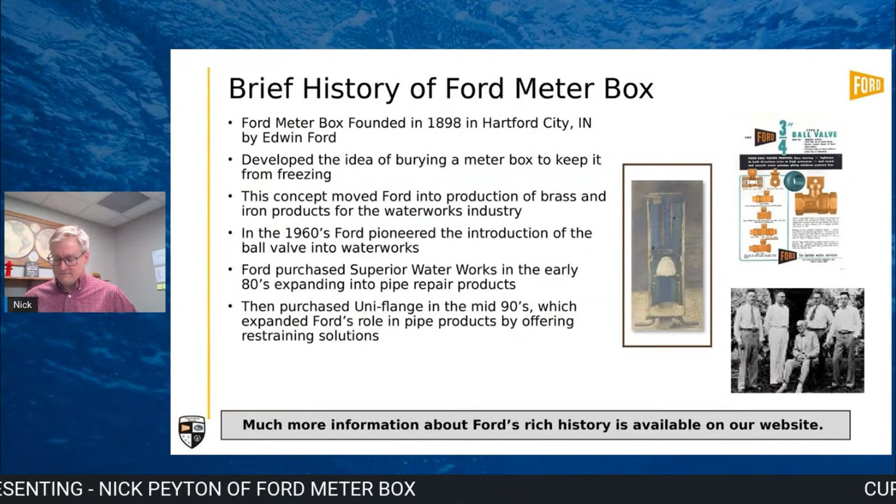Now that was the overview of the history, and to support that product offering, Ford maintains 2 major manufacturing facilities in North America and 5 warehouses.

First, our headquarters, where I'm actually recording this. Our headquarters are located in Wabash, Indiana, with a facility covering 54,000 square meters or 581,000 square feet. For those reading my slide, I have to keep my audience in both metric and imperial. Not only do we have manufacturing here, we have a brass foundry where we pour no-lead brass and some leaded brass occasionally, but we machine, bend, weld, and ultimately manufacture thousands of brass products, meter setters, and meter pits annually.

Now, in the southern part of the United States, our Pell City, Alabama facility is home to our Uniflange restraint lines and many other pipe products. There, they cut, stamp, weld, machine, and create finished pipe products, which means we cover everything from repair clamps to tapping sleeves, couplings, and joint restraints. This facility covers 31,000 square meters or 335,000 square feet, again for my metric and imperial members of the audience today.

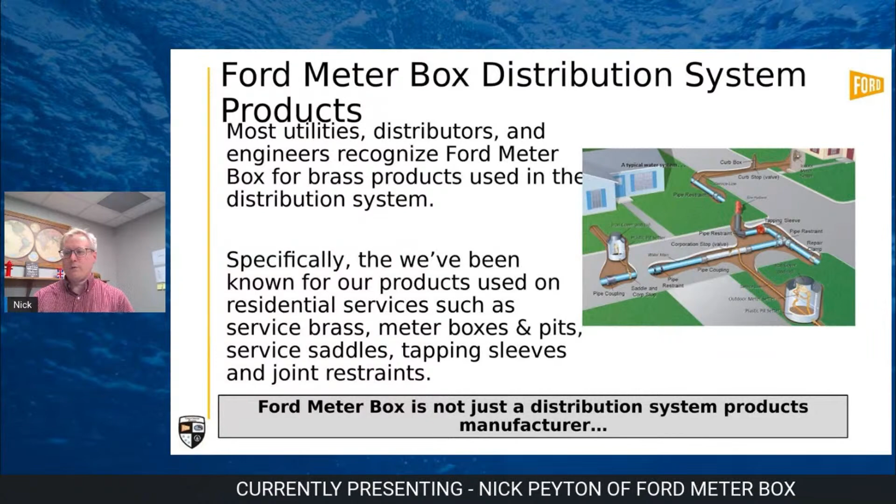But in the past few decades, we've also become more synonymous with Uniflange, the joint restraints, and some of our other restrained product offerings. So to sum this up a little bit, for the underground or distribution market, Ford has been a trusted supplier of our products for over 100 years, with a variety of products that go from the pipe all the way through to the residential service.

Now, what most people don't actually connect us with is that we also serve the plant side of the business as well, or the area inside the fence — the applications of both the water and wastewater systems that aren't necessarily associated with the distribution system or residential connections.

To give you an idea of the various types of projects that we can supply products to, let's take a look at some of those areas and markets. Now, I apologize in advance — that's mighty fine small print there, and I should have done a better job to make that bigger and more available to you. But let me walk through some of the highlights of this slide.

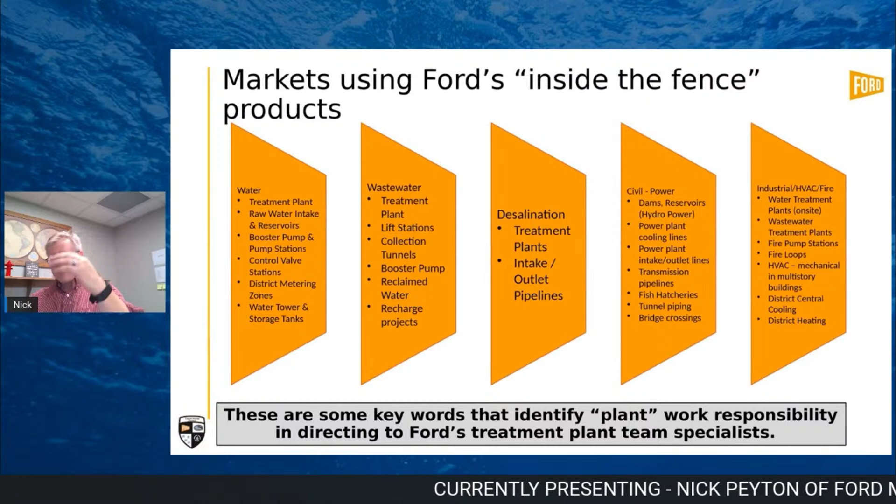In the water market, you can find our product on treatment plants, booster pump stations, water towers, control valves, zoning vaults, district metering vaults, and many other water applications. And then on the wastewater side, you can find us in the treatment plant, our lift station, collection tunnels, booster pump stations, and recharge and reclaim water projects.

You'll find our products also in some desalination facilities, on the intake lines or in the actual facilities themselves. And then in the civil market, you'll be able to find our product in dams, reservoirs, power plants, fish hatcheries, tunnel piping, and even bridge crossings.

And then lastly, we cover the industrial market — whether it's a private treatment facility or something along the fire pump station or in the fire loop itself. So as you can see, we cover a number of project types and markets that cross over and are adjacent to both the water and wastewater market.

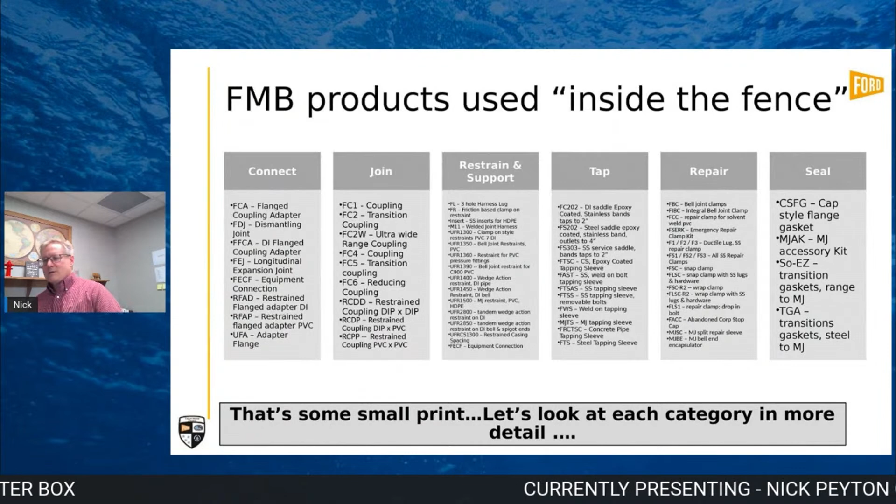But more specifically — and that's a very broad way of saying we have products in those markets — what exactly are those products? Now again, my apologies, because if you thought the last slide was pretty small print, this one is really going to test your eyesight, and I apologize. You might actually think at this point I get paid by the word. I do not, and I'm not going to read this word for word. We're going to talk about the highlights on this slide.

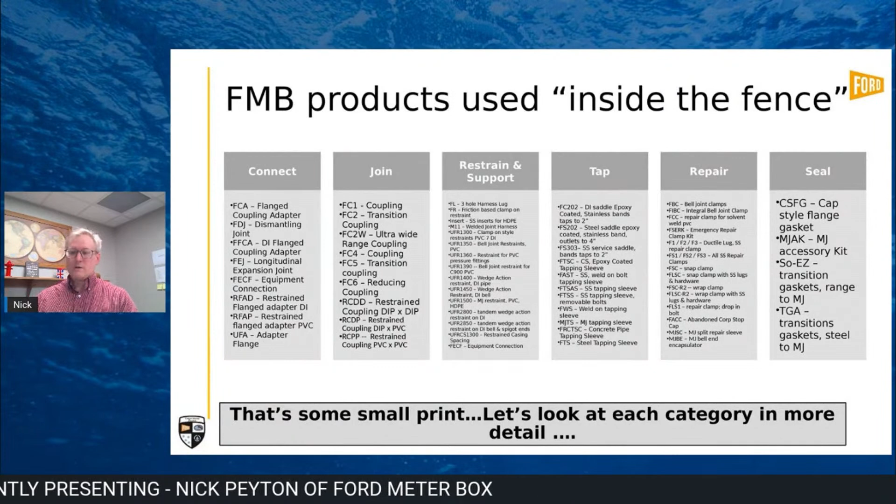This page gives you an overview of the sheer breadth of product that we can manufacture based on the application within the facility or within the project, in these areas inside the fence. So we make products that allow the pipelines and plants to function within the water or wastewater system, both above and below ground. To help make sense of it, we've broken these up into some categories.

We can talk about products that connect flanges or join plain ends of pipe. We provide products that can restrain and support the pipes and pipelines. And from small line to large diameter, we provide a range of products that tap and allow for adding a new line. And then when those lines leak, we offer a line of repair solutions to match your preference. And whether you're connecting or joining, we also offer products that provide the seal in those joints.

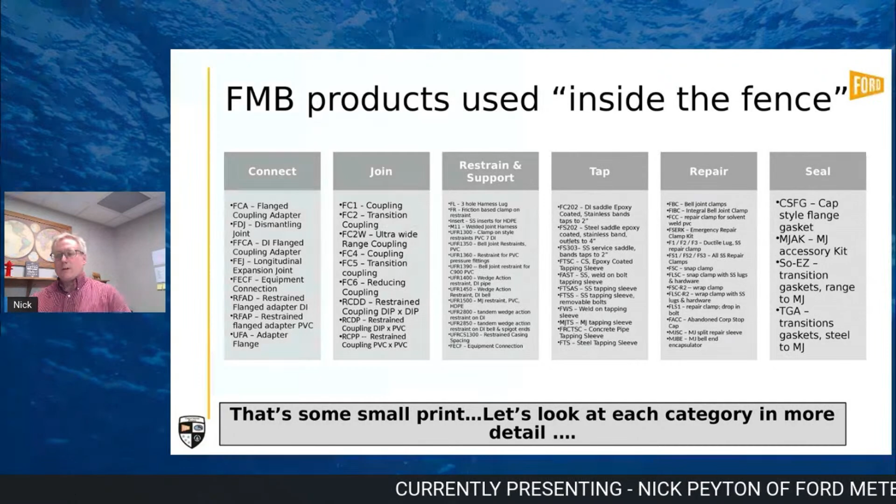Now, as I said, we're not going to go through each one of these models — I'm going to speak on each of these categories with some general information. Several of these products are similar but reflect a choice of a utility based on materials or configuration, or maybe a pressure category. So you're not going to hear the specifics, and I'm not going to bore you with every minute detail on size range or pressure rating of this product — unless, of course, you've already tuned me out, you're not listening, and then there will, in fact, be a test at the end.

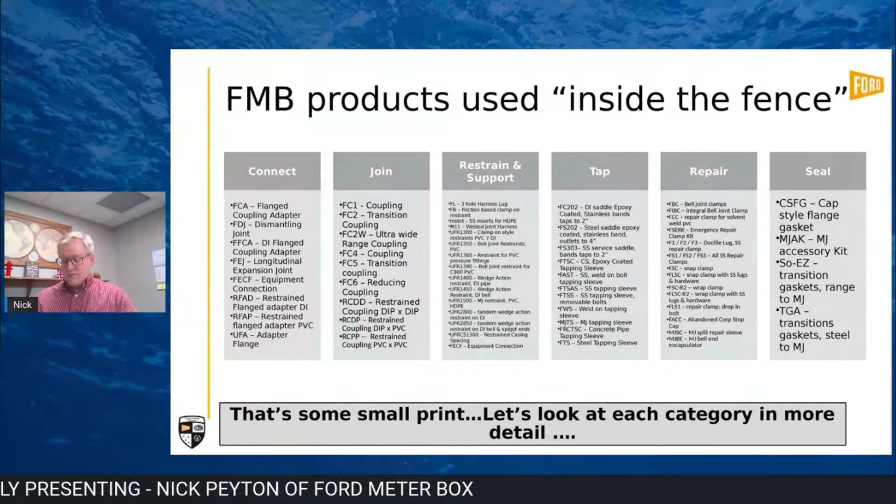This is meant to be fairly general, just to highlight the sheer scope and breadth of our product and an understanding of how Ford is your pipe products partner within the treatment plant market.

I'm going to start with the connecting group, or the flanged end. The simple flanged coupling adapter, whose name states exactly what it is, we make those to expansion joints, or the maintenance team's best friend, the dismantling joint. We offer a range of products, both restrained and unrestrained, for connecting all of these flanges together.

One of our more recent products added to this group is the equipment coupling, or equipment connection. This is an upgrade to the dismantling joint. It offers a 3/4 inch offset and up to 4 degrees of angular deflection, which helps cover lateral, radial, and angular misalignment, a common challenge when connecting old pipes or installing new equipment into an existing pump station.

All of these flanged ends and coupling adapters cover the spectrum of pipes. They come with ANSI 125-pound for ductile iron, or 150-pound steel ends, depending on which nomenclature you use. Other flange drilling patterns can be made available, such as 250-pound on ductile or 300-pound on steel. So we have a wide variety of flange couplings in our arsenal.

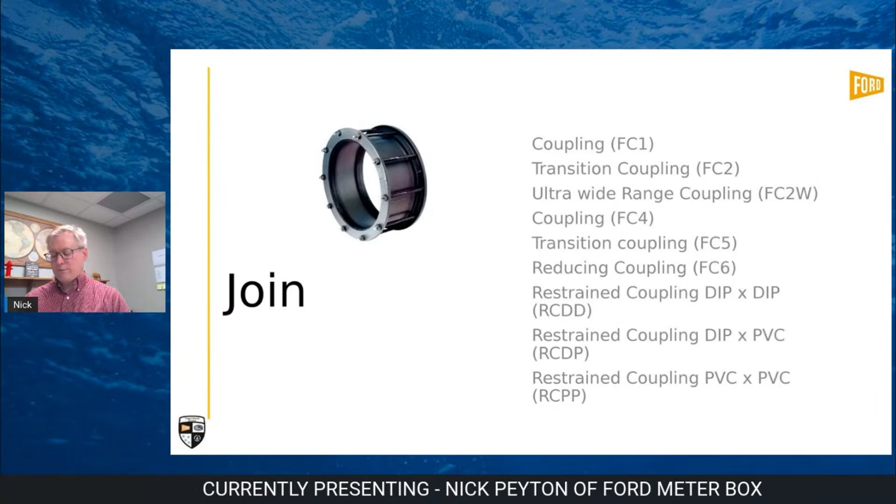Now, moving to joining two pipes together, whether the same type of pipe or two dissimilar pipe ODs, we have an array of joining options as well. While most above-ground piping consists of steel or ductile iron, the need for a wide range coupling is infrequent. But transitioning pipe sizes with a reducing coupling can often be found in buildings, connecting older lines to newer lines, and we have the solutions you're looking for.

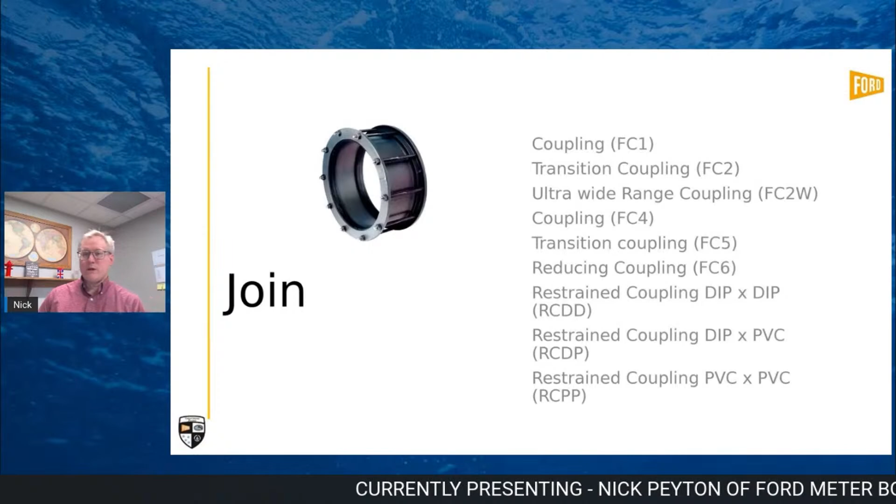You've also got piping between buildings that can be PVC when buried underground. We have a line of restrained couplings that can cover either ductile iron pipe OD or PVC OD, or even connect ductile to PVC. All of these products are designed to join the same type of pipes or different pipes together. And if you need to join steel to PVC and then back to ductile iron, we can cover that for you too.

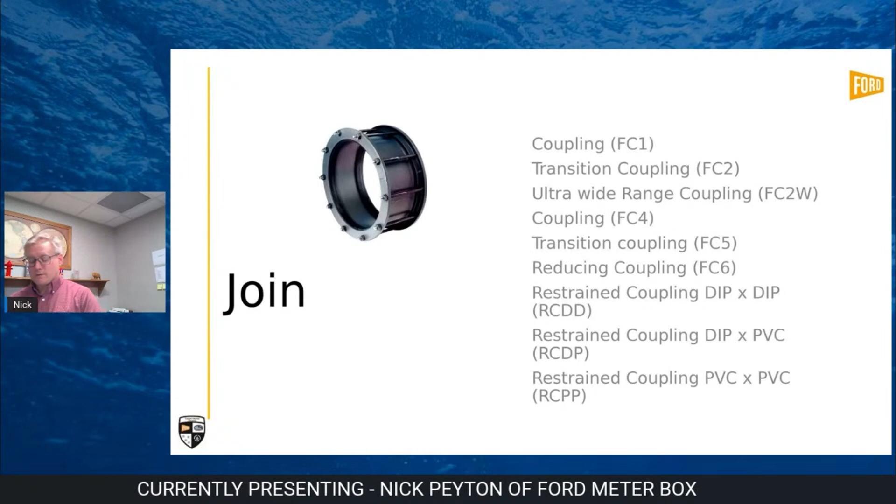Now, in the prior two slides, I did mention restraining product. We know that in this industry, you need to restrain pipe. Whether it's covering piping on a connecting flange or covering a joint of pipe, we have a wide range of Uniflange branded products.

We have everything from the very simple flanged lugs—that's just a restraint or a coupling that'll restrain a coupling between two flanges—to inserts for stiffening HDPE, or high density polyethylene, to covering a range of PVC or ductile iron restraints that can restrain the bells and provide you a restraint at the mechanical joint end.

We have a number of products, some of which I've mentioned, that are either on the connecting or joining slides. One thing to highlight in this category is that we also have a line of restrained casing spacers, a product that can support the pipe barrel or support a pipe bell. All of these products offer you a solution in restraint.

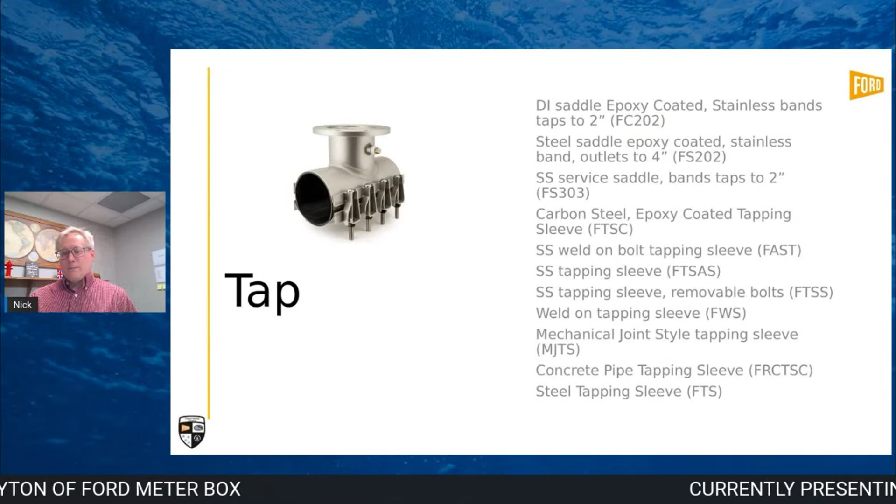We offer an array and variety of tapping sleeves and saddles depending on your preference. You have everything from small service saddles that support inserting new chlorine injection points or adding a small line for test sampling, to a tapping sleeve in all stainless material, a drop-in bolt, or a repair clamp type for installing a new large line. Prefer to weld your steel outlet onto your steel pipe? We've got that covered as well.

One of our newest product offerings in this category is our tapping sleeve for concrete pressure pipe, which allows the tapping crew the ability to tap and then regrout to the existing line, so you can successfully transition from your concrete pipe to the newly added line of your material preference.

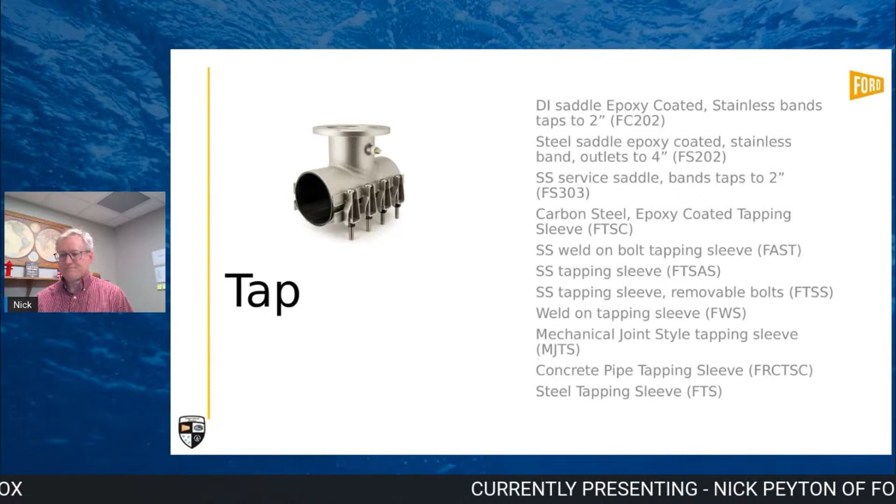Now, we covered connecting and joining and restraint and tapping, and this is the area where normally you have some conversation, because unfortunately pipe and pressure, with that comes leaks in the system, and this happens inside the plants, inside the fence, just as much as it happens out in the distribution system. They can be small leaks, they can be large leaks, and they can come in many different types and sizes.

So depending on the type, we have a number of options based on your preference and how you want to repair. Do you need just a bell clamp? Have a pesky pinhole leak? Do you prefer a ductile or stainless lug for your repair clamp? We even have a service pack option called the FSERK, which allows a small utility the ability to repair multiple OD of pipes within a system by just having a small number of interchangeable repair clamps.

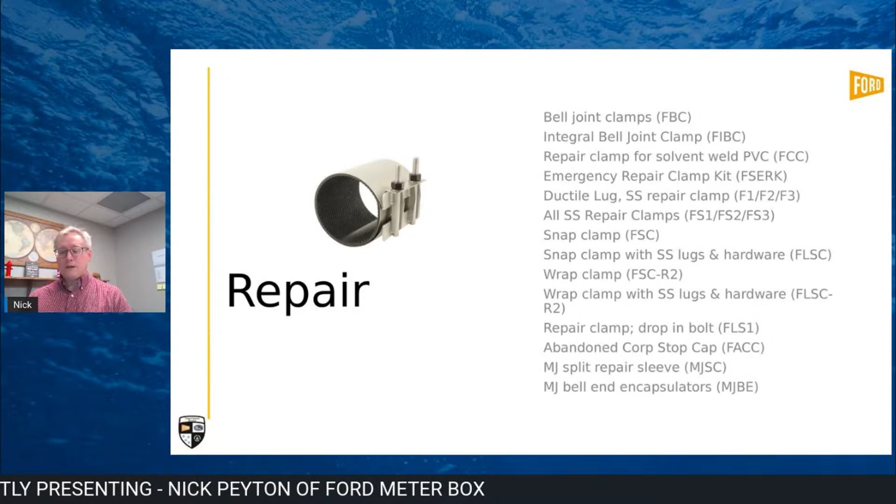But one of our newest products in this category is the bell Encapsulator, which fully contains a leaking bell end, in applications where cutting the bell out or shutting a line down completely are not available. So we've added that product, and again, we have a wide variety of offerings to cover how you would like to repair an existing leak or problem within your system.

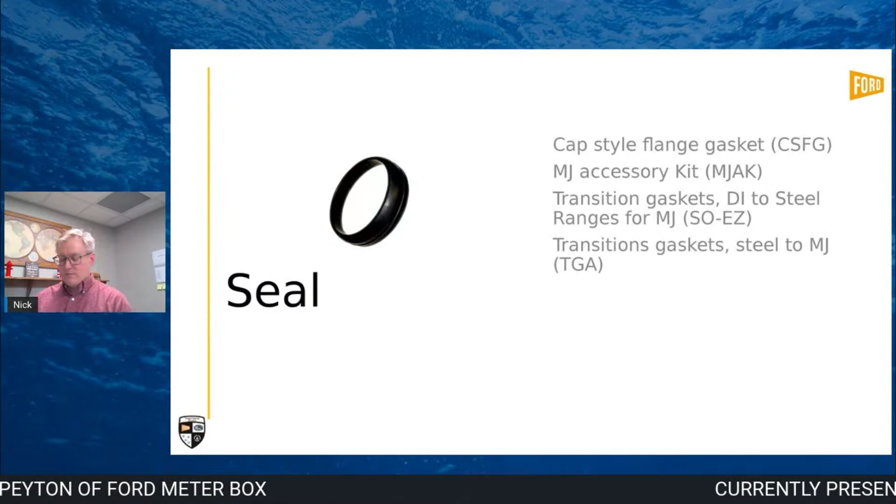Now, all of the previous slides were some type of connecting or joining or tapping, and we do want to take a moment to focus on some of the items that we have in our offerings that help do the hard work of providing the actual seal.

And we do have a full flange covering called our cap gasket. We also offer a patented SO-EZ gasket, which allows you the ability to transition from a steel pipe into a mechanical joint end, and gives you a cost-effective alternative, allowing a large diameter steel line, 14 through 24 inch, to be adapted to your mechanical joint product. Again, all of these are a must-have product if you're using it in both buried or above ground applications.

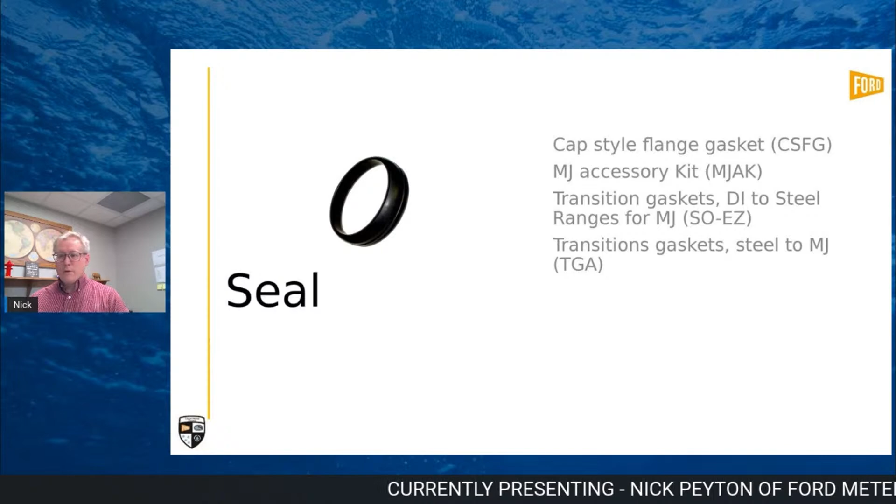Now, that was the product overview. And this is where I take a moment and take a breath, and then also say that we're going to talk for a couple minutes just about coatings.

Ford's product can come in one of several coatings. Each product has its own base type of coating. I should mention here that our 304 or 316 stainless steel products are typically not coated, nor is a steel product that is meant to be welded on or joined up to another - that's going to be a field application. But all of our standard ductile iron or steel products do have some type of base coating, and we will use one of the following types.

So we offer an E-coat or an E-coating that we use on all of our cast restraints. This coating methodology comes from the automotive industry. It takes a small thin film or microfilm of our material, applied via a heat treating process. And the end result is you get a very good scratch and chip resistance and good long-term corrosion protection - a very popular coating that we offer.

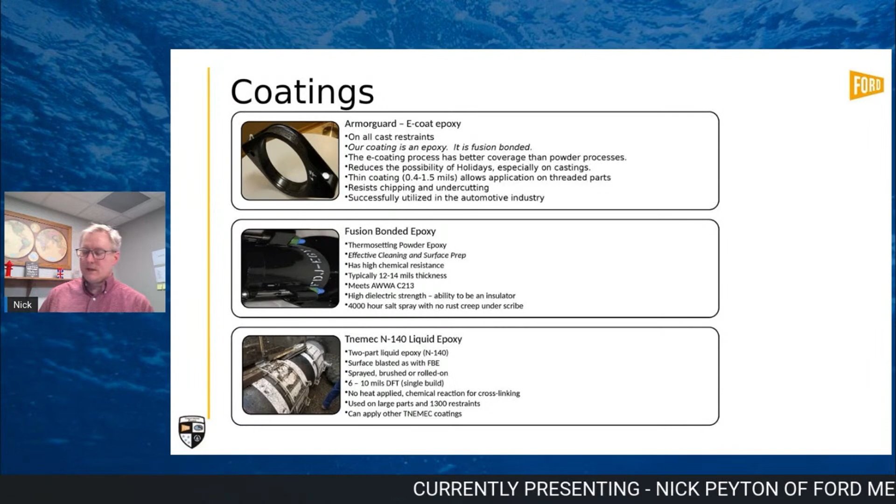Another is the FBE, or fusion bonded epoxy. In that process, you have to heat your casting up and then apply a thermosetting powder epoxy. A critical requirement of that particular coating is the cleaning and surface preparation. When done properly, by blasting and getting a near white finish, you've applied the thermosetting epoxy. The end result, you get anywhere from 12 to 14 mils thickness of the coating, and again, that's going to give you good, solid corrosion protection.

Then the last, and probably most popular, is our two-part liquid epoxy. In this case, we use a Tnemec brand N-140. Our surface preparation on the castings and materials is the same as what you would do for a fusion bonded epoxy - again, you have to blast and prepare your casting for the coating. Surface preparation, again, is key. One of the advantages is not having to heat the casting up, but also some of the overcoat ability that you get in the two-part liquid epoxy, which is often a must and a requirement in in-plant applications.

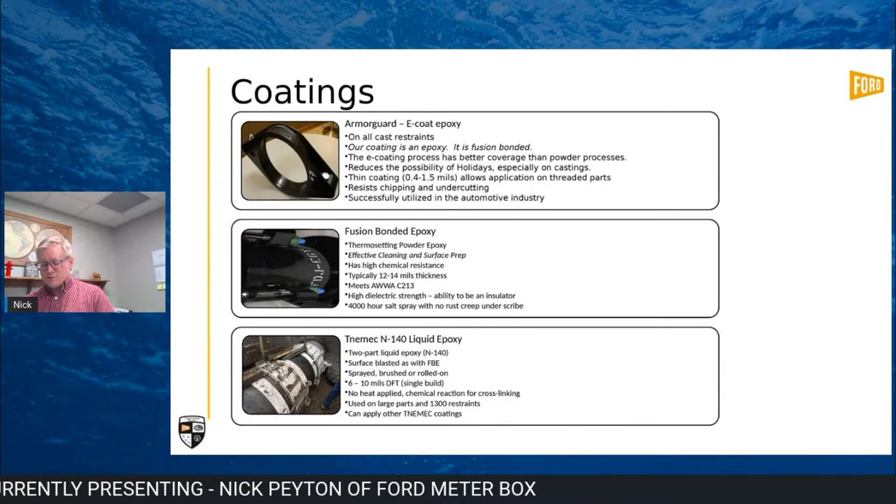Now, again, I'm going to take another break because usually this is where I pause and catch my breath. And usually I have several people who are trying to ask a question about which coating is best.

And so I am going to give you my best consultant answer: it depends.

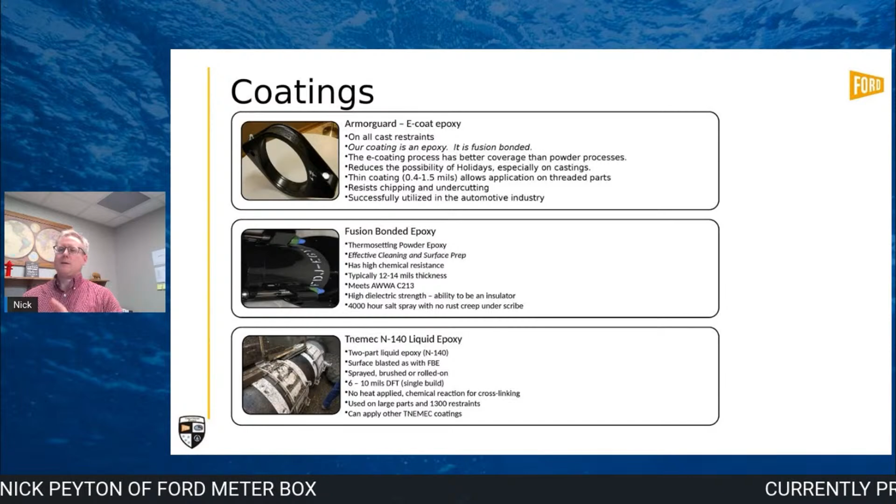Each product has different applications and options and considerations. Some are based on casting size, some are based on the product application, and some are even based on how you're engineering or designing your system.

Most are going to be concerned with product coating and durability, and the bigger concern is whether it's going to be able to be handled roughly. And if it is damaged, can it be field repaired and overcoated?

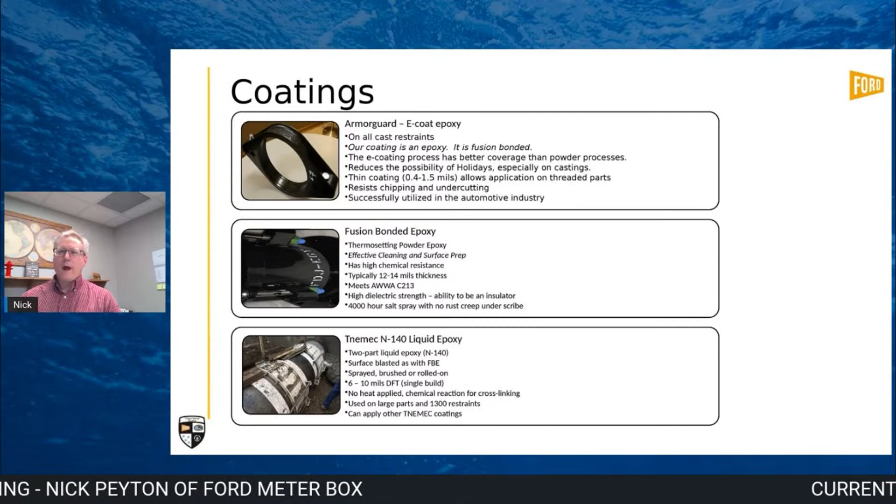In real world installation, you get real world handling, but then reality sets in. The products do get scratched and dropped and gouged and hammered, and quite frankly abused, in the field.

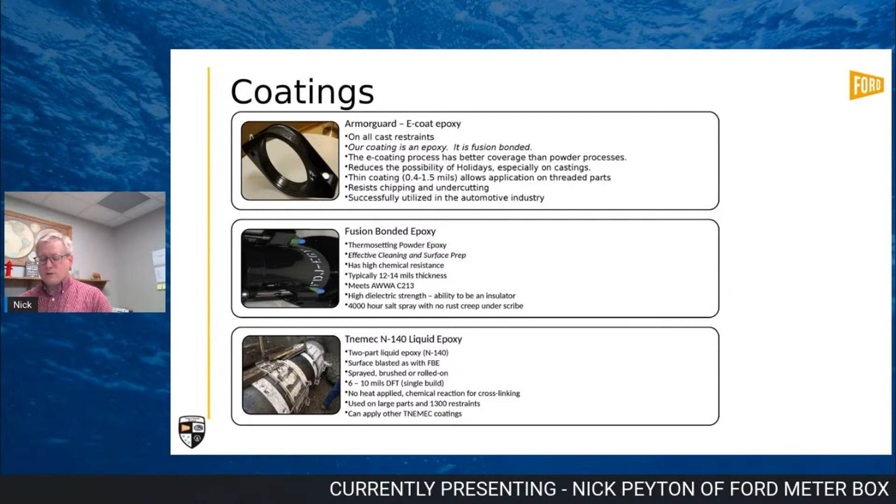You want to have a product that can accept an overcoat option, and that overcoat option can be field applied. That gives the owner, the utility, the contractor the best opportunity to do a field repair and on-site painting.

Now that was a very brief overview of our coatings, and I would encourage, if you have more questions on that, you can get in touch with our local sales team as well on coatings and coating specifics.

Now, in addition to all of those products that we talked about, Ford also offers tailored and engineered solutions. So if you need a special tee or some other fabricated product, we can design and build products in both steel and stainless steel materials.

You looking for a special outlet, an adapter spool, or just a connection or a challenge on how to connect or join two ends, we can help.

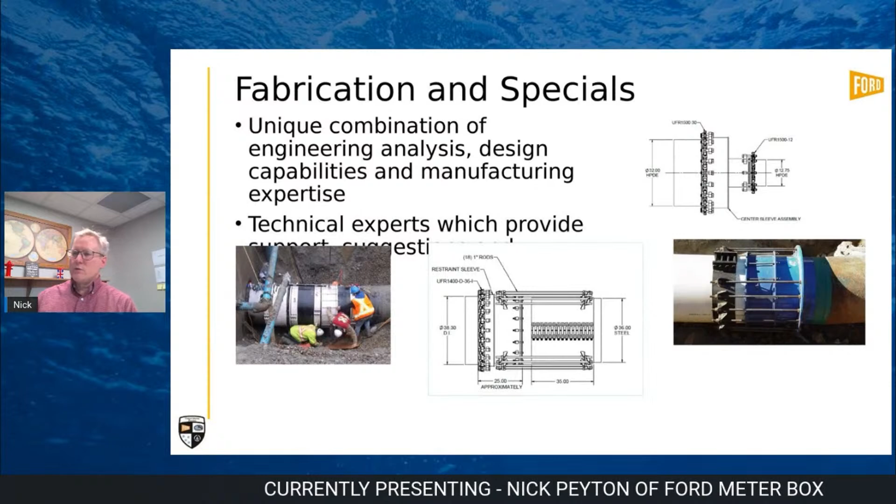And not only can we provide you with fabricated solutions, but engineering restraints, we can help provide you some tailored systems that will be specific to your applications. Again, we can give you exactly what you're looking for.

So if you have a special requirement, you need a dismantling joint that is 125 pound drilled on one side to 250 pound on another, we can do that.

Just be prepared to have some back and forth questions, such as the size, the type of pipe, what exactly are you trying to accomplish, are there any pressure constraints, and then, of course, how fast do you need it?

So looking at this, why is Ford your plant partner? Over the last 15 minutes or so, you can now take a breather, nudge your neighbor, start to wake up. This is where we're going to do the recap so you can tell your supervisor that you paid attention.

And we covered everything from connecting, joining, tapping, repairing, and sealing pipe, and we do all of that. We're constantly working with our customers and engineers to enhance our product offering, to give you an improved product, improved materials of construction, and even improving our communication with our channel partners and providing them training tools. We're doing all of that.

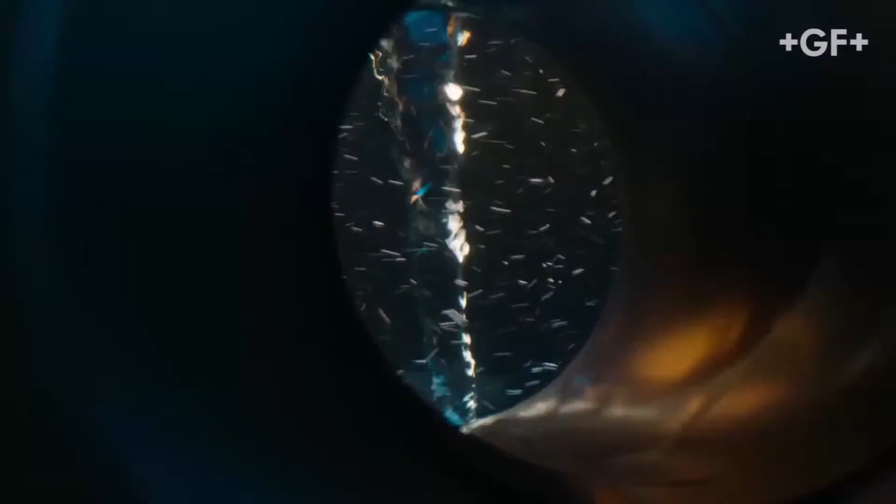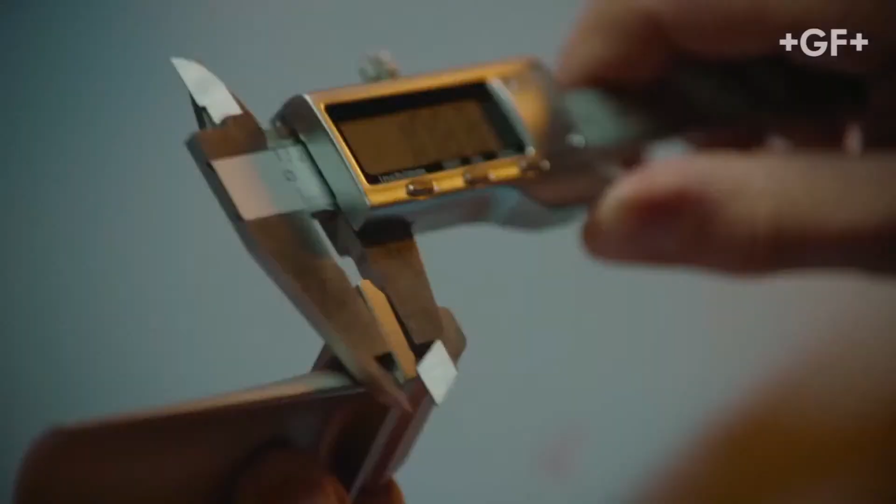It's GF. What is GF? What do these two letters stand for? Good question. GF is a big company, but it seems not everyone knows what GF is doing. Do you know what GF stands for? Well, let's find out. Could it be grapefruits, maybe goldfish, or girlfriend? Of course, it's none of them. Actually, GF stands for Georg Fischer, but nowadays it's much more about... well, it's not grapefruits. Our ambition from the day this young and modern company was founded, over 200 years ago, becoming better every day since 1802, has made us going forward ever since. Around the globe, our people are all about innovations, precision, Swiss quality, and sustainability. It's actually in our DNA. Going forward saves water by providing leakage-free piping systems and bringing it to wherever it's needed most. It means reducing the weight of automotive parts and therefore CO2 emissions. Look at this crosscar beam. Half the weight, double the functionality. What do you think?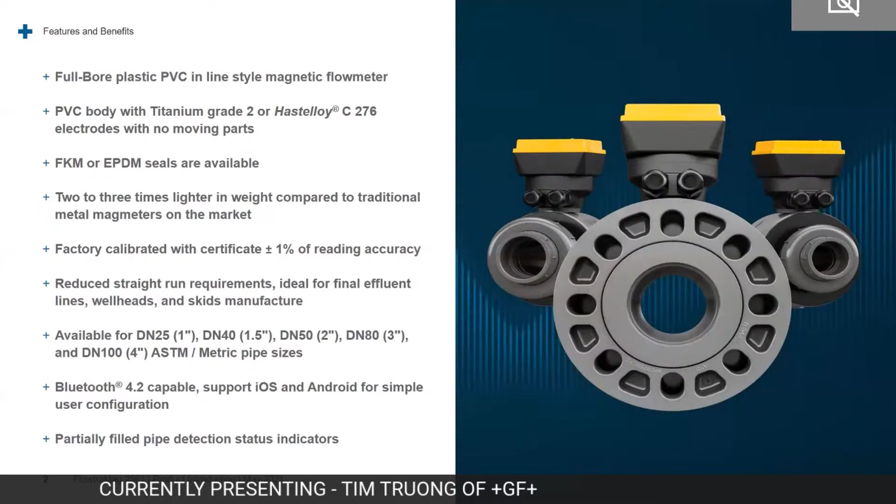And it can detect a partially filled pipe. Basically, most mag meters require a full pipe in the process, but this particular 2581 can detect the condition of the flow velocity in a partially filled pipe.

There's no pressure drop, and it can detect either a reverse flow direction or forward flow direction. So if the customer sees the reverse flow direction and they do not like it, they could configure it directly with their mobile phone or directly with the 0252 configuration tool.

One device with 3 different outputs, so it's field selectable. We offer frequency or digital S3L, and also analog 4-20 milliamp output, either passive or active, directly to the PLC. So again, this is really unique for water treatment skid manufacturing, chemical dosing, and any chemical processing application.

On the digital S3L or frequency output, you can select directly to the configuration tool or directly from your mobile phone via the Bluetooth app. When we ship each FlowtraMag, the default is frequency, so the customer could change to frequency or S3L.

On the analog output, we have active and passive output. That can be selected directly from your mobile phone or from the 0252 configuration tool connected to your PC. The default we ship from the factory is passive. Each FlowtraMag body is pre-calibrated with a K factor traceable to a NIST certificate.

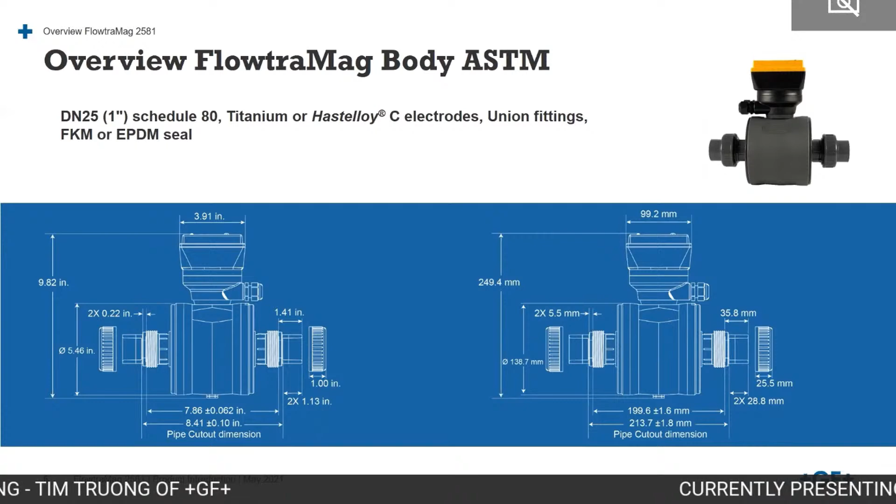Now let's look at the overview of the FlowtraMag 2581. As mentioned earlier, we offer a DN25, which is 1 inch, Schedule 80 PVC pipe. The electrode comes in either titanium or Hastelloy C, with a union fitting, and the seal is either FKM or EPDM. We offer different part numbers for titanium or Hastelloy C with FKM or EPDM. This is the DN40, 1.5 inch, also with a union connection.

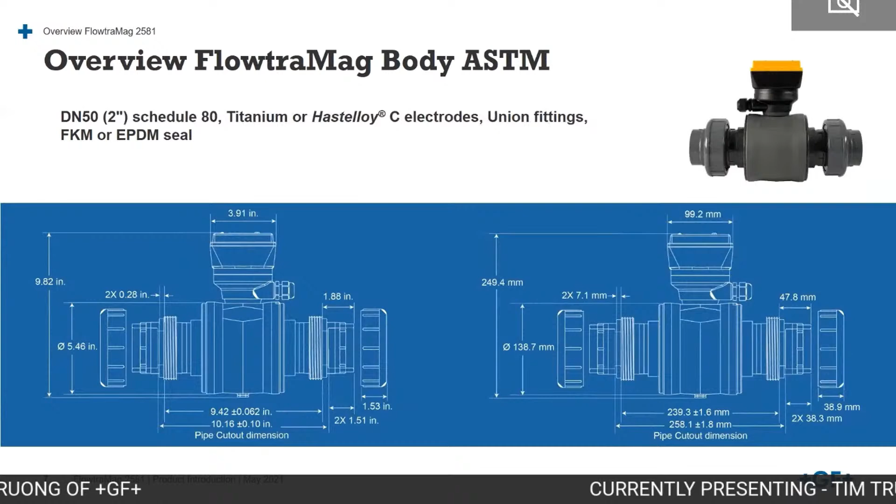The 2 inch DN50 also comes with union connection. The only difference is the DN80, 3 inch Schedule 80. Again, we offer 2 electrode materials, titanium or Hastelloy C, but on the plastic connection, this uses a Vanstone flange. So from 1, 1.5, and 2 inch it's union, and 3 inch is Vanstone flange, with FKM or EPDM. Also the 4 inch DN100 uses the Vanstone flange plastic connection.

This is the overview of how the FlowtraMag looks. You have a screen showing on your mobile phone, displaying the totalizer and live reading directly from your mobile phone with the flow velocity. This is the blind electronic housing, same for all sizes, and it can send the signal, either S3L digital signal or frequency, directly from the FlowtraMag to a transmitter or controller.

Active or passive 4-20 milliamp signal directly to a PLC or chart recorder, and then you could read locally via the Bluetooth app. We support iOS and also Android.

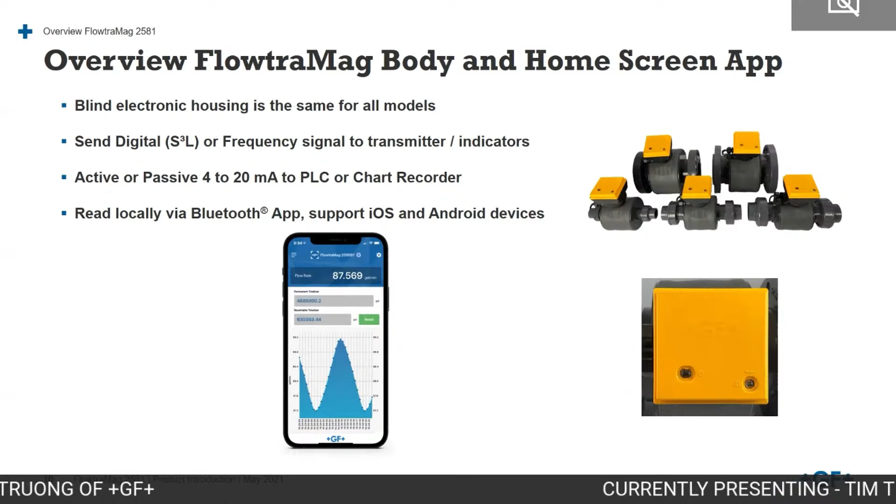To talk about theory of operation, how this FlowtraMag works is similar to the traditional Mag meter in the market. Basically, water flows directly through your pipe, and the coil generates the magnetic field, and the electrode detects the voltage from the magnetic field and flow velocity to tell you how much water went into the pipe. This is then displayed on the transmitter or controller, or directly from your mobile phone, showing the flow rate and totalizing.

Some applications I'm talking about, the target applications—mostly this information is mainly for our GF internal use, for our sales guys visiting customers to show the information to the OEM or customer. The market potential for this is industrial wastewater, municipal water treatment, landfill, chemical processing industry, energy, and OEM. Because the body is entirely plastic material, this is a unique selling benefit against metal Mag meters in the market.

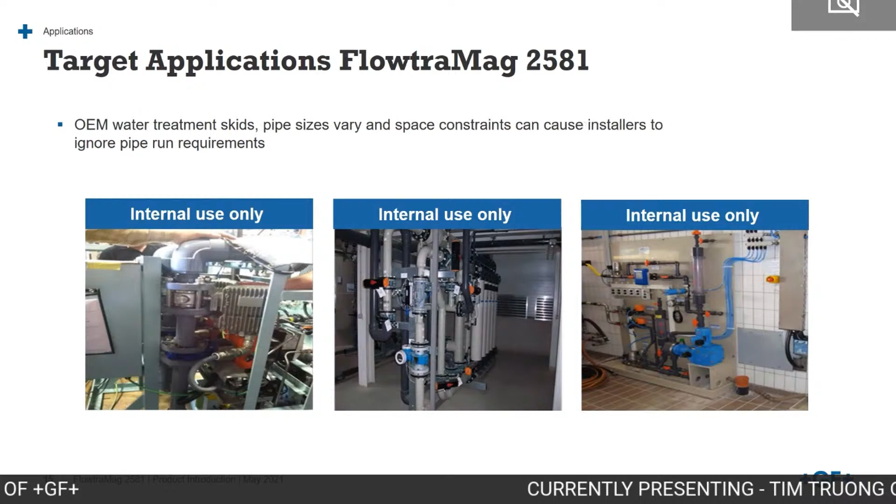It's also good for OEM water treatment skids because it requires a short inlet and outlet. Most water treatment skids require very constrained space, needing short inlet and outlet from the process. We've been selling this FlowtraMag in the market since 2019.

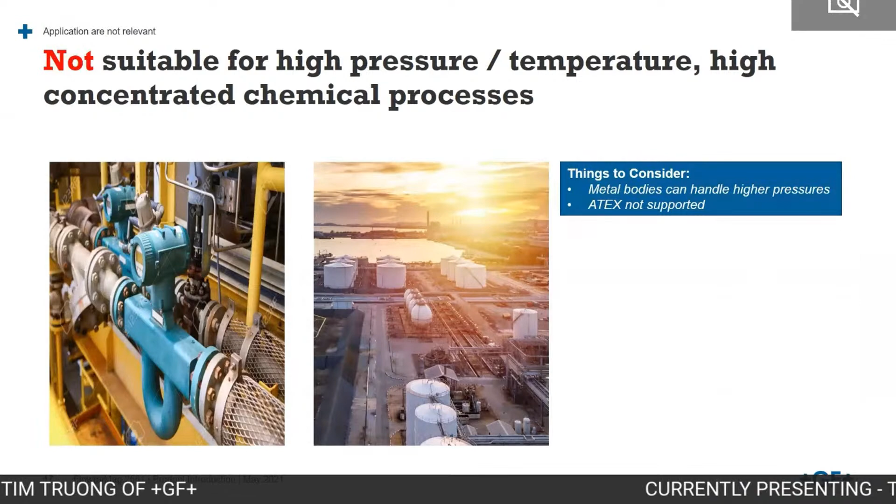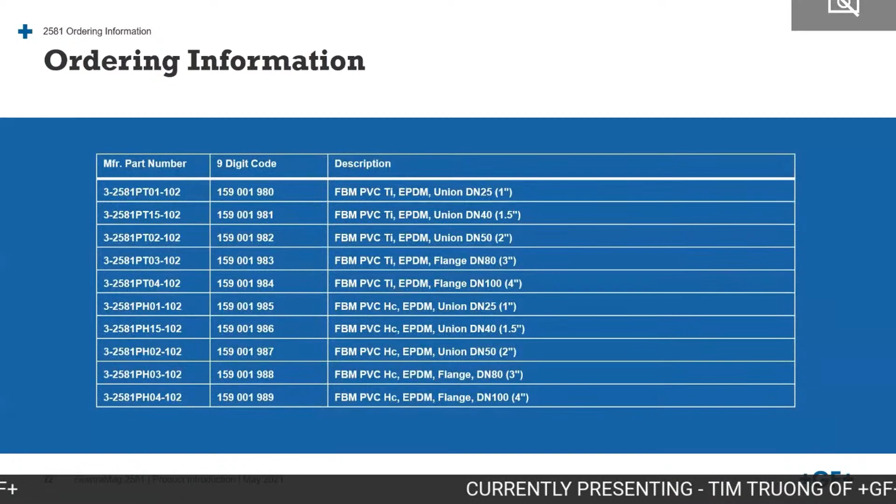Some ordering information - we offer 2 different materials of the electrode and 2 different materials of the sealing, which is FKM or EPDM. This is our traditional manufacturing part number, and also the 9-digit code number for the customer to order, plus the description. The last 3 digits, 102, is the EPDM material.

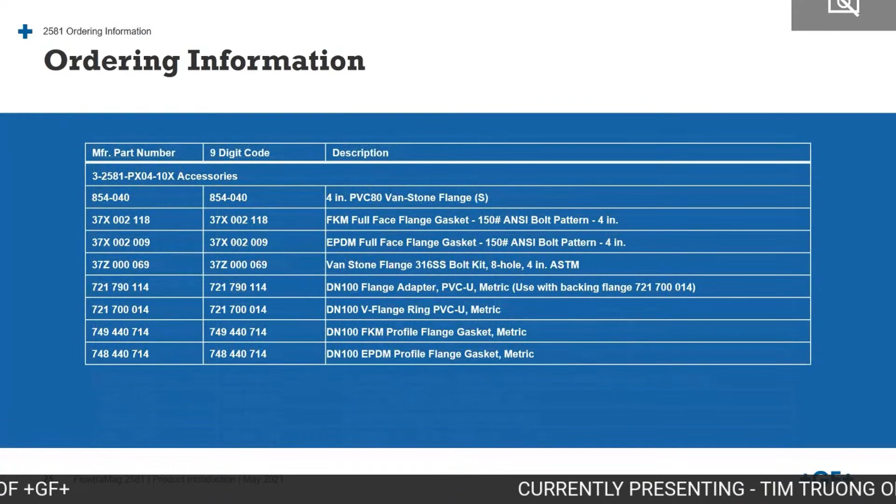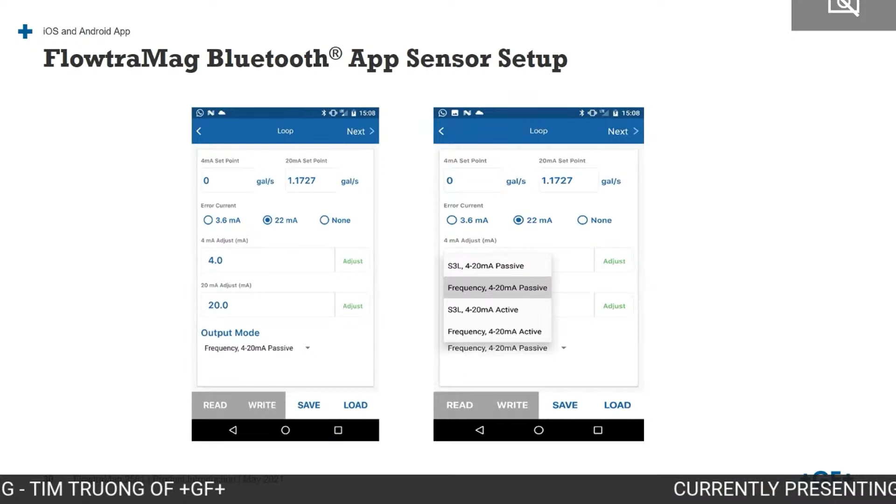Again, the default value from the factory - we ship it set to frequency, and for the 4-20 milliamp we set it to passive. So if you have a PLC taking an active signal, you have to change the output mode to active.

Always, when you are pairing the FlowtraMag with your mobile phone, you need to read the information from the FlowtraMag, because all the calibration data and information is stored inside the flow body. When you connect your mobile phone, you need to read the information, and then you can see all the information from your mobile phone.

Every time you change a configuration, make sure you save it and write it back to the flow body. Even if you save it directly from your mobile phone, you still need to write that changed information to the flow body. So you read the information, make a correction, write that information to the flow body, and save it. Then if you want to load it again, you can click load, and load the information that you already saved to the flow body.

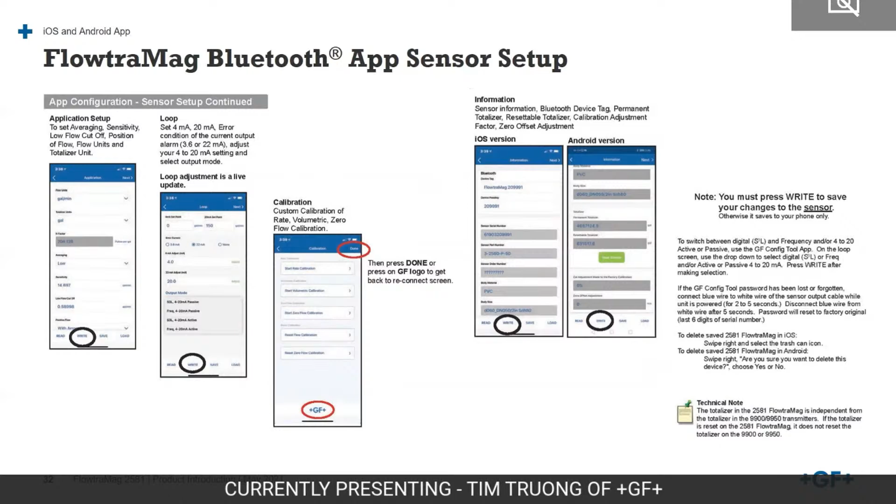And this is how you're going to see directly from your mobile phone. So you have the FlowtraMag, the 6-digit number, which is the product serial number, and also you have the light, which is a static light, either blue, red, or purple. That indicates the activity happening inside the flow body. And it's going to show you the flow rate, which displays how much gallon of water or how much liter of water is in the process.

It shows you the totalizer. One is the permanent totalizer, which you cannot reset. The second one is the resettable totalizer. And then it'll show the graph, which is the live reading from the FlowtraMag.

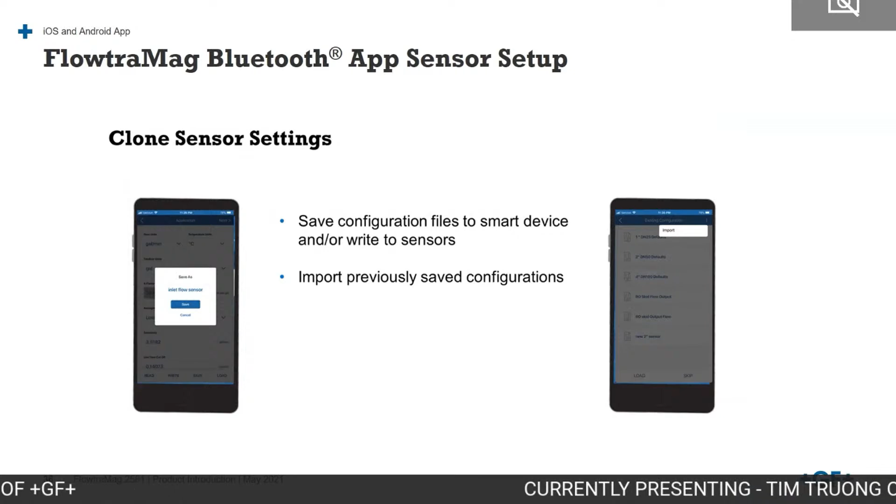Okay, this is how you configure your sensor, and this is how you clone it. So basically, if an OEM has multiple units, and each unit has the same calibration information, all they have to do is calibrate one, and then clone the information to the second, third, and fourth unit.

Again, each FlowtraMag shipped from the factory is already calibrated, but sometimes the customer adds chemicals to the process and the viscosity of the fluid changes, so they want to do calibration, which they could do directly from the mobile phone. There are two methods of calibration: one is rate calibration, the other one is volumetric calibration.

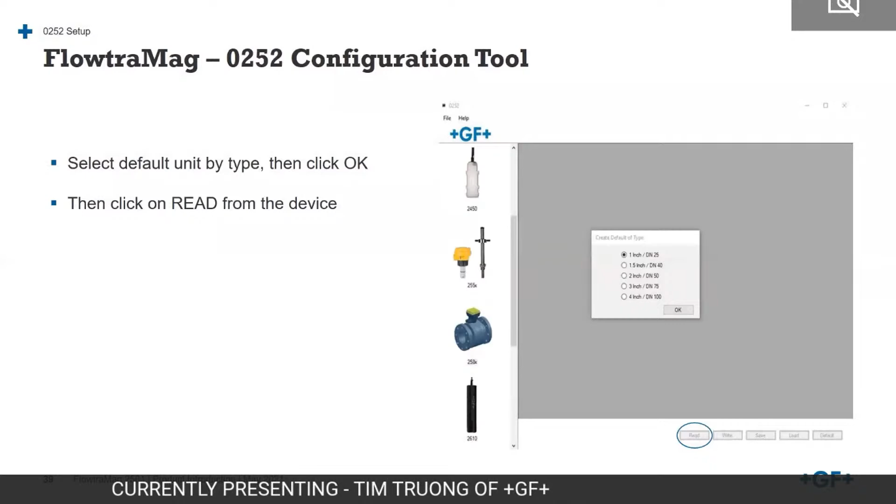And the second setup is directly with the 0252, which requires connecting to your PC. It's the same method of calibration. When you connect to your PC, you select the FlowtraMag 2581, and it'll give you a default of sizes: 1 inch, 1.5, 2, 3, and 4 inch, which is DN25 to DN100. Then the same thing, the application tab.

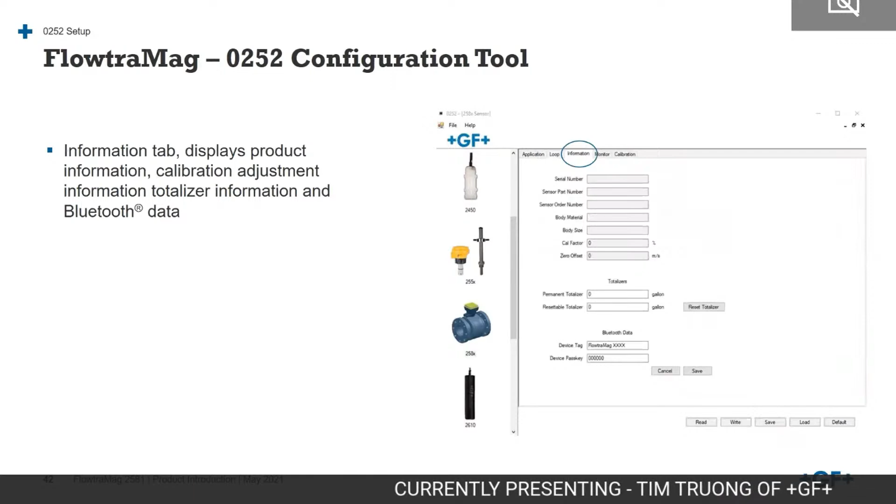Similar information to your mobile phone, and the loop, which is your 4-20mA, and your FlowtraMag information, and then monitoring basically the live graph directly from your mobile phone. So you could save the file as a .csv, and then you could send that file, save it, and send it to your customer. And calibration again: wet cal, volumetric calibration.

So now we're talking about the specification of this FlowtraMag 2581. So the wetted material, as I mentioned in the beginning of the presentation, right now we only offer PVC. The electrode, we have titanium, which is grade 2, or Hastelloy C276. The seal is FKM or EPDM, and this is Schedule 80 PVC.

From 1, 1.5, and 2 inch, it comes with a union; 3 and 4 inch is a Vanstone flange. The flow range is 0.02 meter per second, which is 0.07 feet per second, to 10 meter per second, equivalent to 30 feet per second. Accuracy is plus or minus 1%, plus 0.01 meter per second. Repeatability is plus or minus 0.5%.

And the power requirement to power up this FlowtraMag is DC 24 volt, maximum 24 watts, with a regulated power supply. So you could connect incorrectly, which has reverse direction protection up to 35 VDC. Because of the plastic material, the operating temperature and pressure is minus 10 degrees C to 60 degrees C, which is 14 F to 140 F.

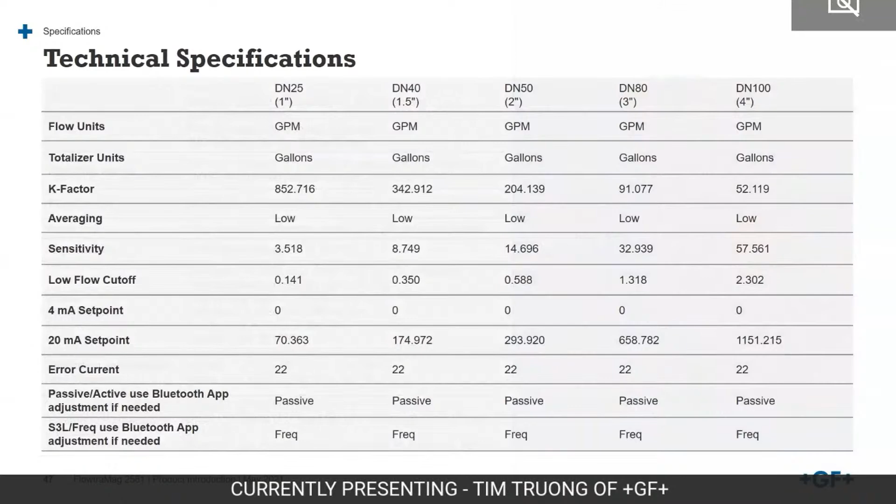And each FlowtraMag that we ship already has calibration information stored in the flow body. So this is just the information that we share with the customer when they order either 1 inch, 2 inch, or 3 inch.

And the upstream and downstream, mostly we talk about the inlet and the outlet. So upstream of the water is required to be 3 times the pipe diameter, and the outlet is 2 times the ID. So basically if you have a reducer, or two 90-degree elbows in 3 dimensions, or a pump next to your process - the inlet, which is upstream, is only 3 times, and downstream is 2 times. So for each different configuration, inlet and outlet are the same: 3 and 2.

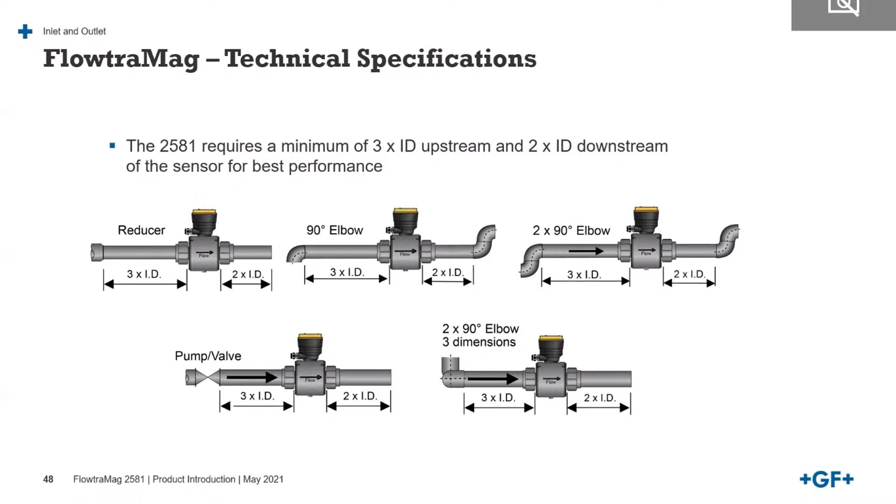And then the one that I mentioned that you need to connect to your PC, which is the 3-0252, the configuration tool that directly connects the FlowtraMag 2581 to a 3-0252, and then on one side is a USB connection directly to your PC.

On the FlowtraMag, there are two indicators, which are two LEDs. One gives you the status light, which is the condition of your FlowtraMag. The second LED is the connection status of your Bluetooth. So when you connect to your mobile phone, if there's a connection, it turns green. If there's no connection, it turns white. And the status light LED gives you what's happening with your FlowtraMag through a different color scheme.

On this particular product, when we launch, we also support the sales company with a toolbox. In the toolbox, we have the data sheet, the instruction manual, and also the setup guide for how to set up the FlowtraMag - so a startup guide, data sheet, and manual.

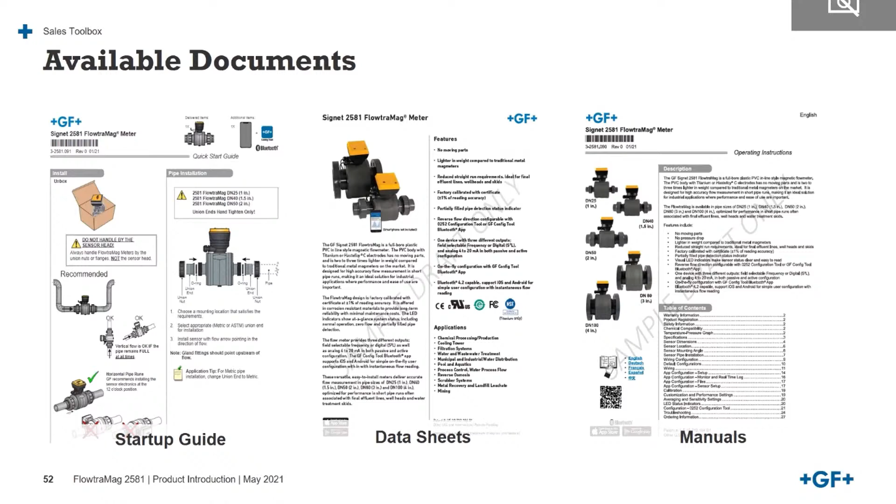Along with that, we also support our ASM with a sales demo box. So with the demo box, the ASM can carry it and show it to the customer - show and tell with the product inside the demo box. Inside the demo box, it has the cable, the power supply, and all the literature that comes along with the product.

And that's my presentation. If you have any questions, we could take a question, and if I'm able to answer it, I will. If not, I will document it and reply back to you. Thank you.

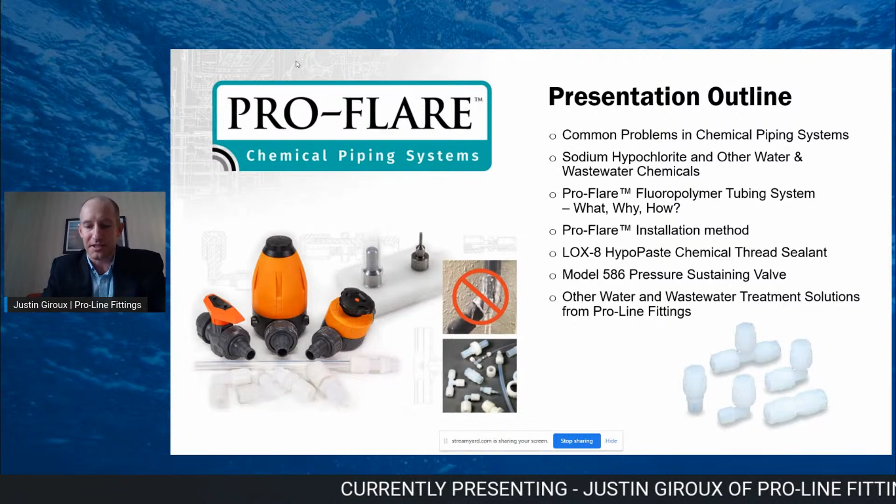Okay, so I'm thinking for folks out there working in water wastewater treatment plants, you've probably seen these kinds of images where you have leaky stalactites hanging down from your solvent welded connections. Most chem feed systems found in water wastewater treatment plants are manufactured from rigid PVC piping, and in some cases also unpigmented polyethylene, that's like a white, more opaque kind of tubing. Both of these materials are widely used and accepted because of their low initial investment cost, pretty inexpensive to use. Unfortunately, both PVC and polyethylene become brittle with exposure to chlorine. Some of you have maybe experienced this where you see a visible leak like the ones pictured here, you go to cut out that piece of pipe and fix that leak, and just by the movement and disturbing that pipe system, you've got more leaks that present themselves. It's almost a domino effect, so you're constantly chasing leaks.

So PVC is the world's third most widely produced synthetic plastic polymer after polyethylene and polypropylene. Again, it's relatively inexpensive and very useful in a lot of industries. It's also readily available, although that's been impacted in the last year.

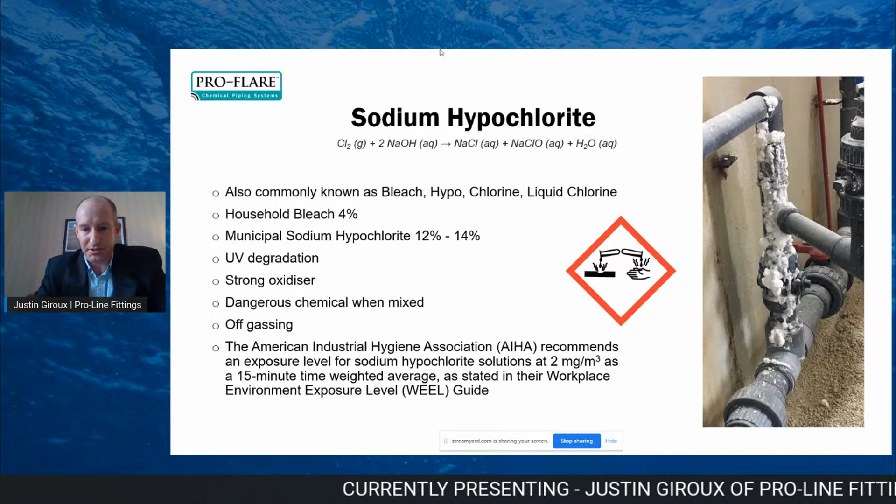It's like chlorine off-gassing that occurs. Chlorine off-gassing can cause effects, obviously problems with valves, pipes, fittings, and usually results in a salting effect where you see those white crystalline formations. There's a note at the bottom about the American Industrial Hygiene Association recommending an exposure level of sodium hypochlorite solutions at 2 milligrams per meter cubed as a 15-minute time-weighted average. So this is what's acceptable.

It's most commonly used in wastewater treatment, again as a flocculant. It's very corrosive to metals, also concrete—ferric chloride can wipe out concrete pretty quickly—and of course, human skin.

Similar to— sorry, Justin. Yeah, do you mind if I butt in here for just a moment? Sure. We actually do have a question from the chat for you, and I don't know if we want to go to a different topic before we answer this question. Is it okay if I ask you the question? Yeah, ask the question. Okay, so Marlon asks: where is the information about the proper solvent and primer to use on PVC for hypo? Also, what is the best thread sealant to use to stop a leak over time? Okay, so that's great, thank you Marlon.

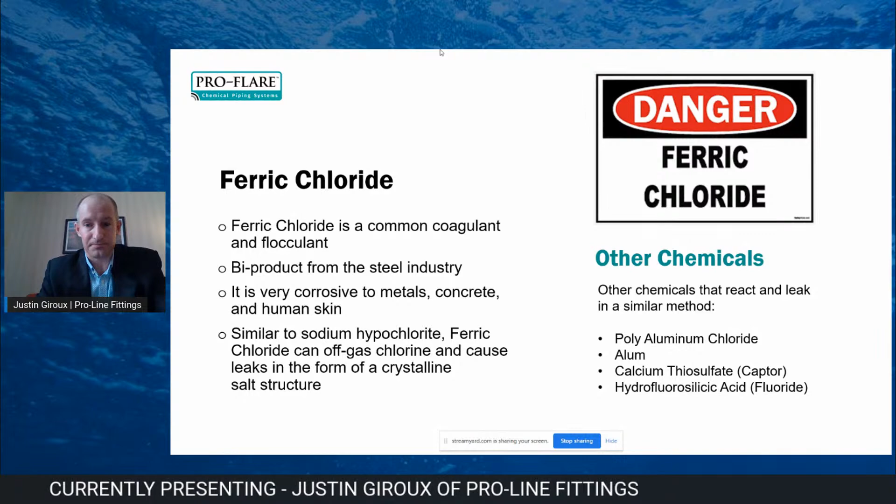So yeah, we talked about how ferric chloride can cause similar problems. We jump into other chemicals—again you've got polyaluminum chloride, alum, calcium thiosulfate or Captor used in dechlorination, hydrofluorosilicic acid which is fluoride, another really nasty one too. Again, ProFlare is the solution for these chemicals, and we're going to get into that very shortly here.

Okay, so the ProFlare chemical tubing system eliminates chemical leaks common in solvent welded and threaded PVC piping by utilizing a flared connection between the fittings and the valves. So rather than having a solvent weld or a threaded connection, we're flaring the tube onto the fitting and using a compression nut to join it.

Now, it's important to note that there's no ferrule and there's no metal going into this compression connection, and the seal is being formed at the shoulder of the tube and the fitting. We'll get into more details on that shortly.

This is comprised of our proprietary branded NSF approved fluorinated ethylene propylene tube, very similar to Teflon. It's chemically inert and does not become brittle over time. It's very fast and easy to install. You can create a flared connection in less than 30 seconds, rated to over 150 PSI.

It's safe, right? That's important. It's very reliable with hassle-free life expectancy for all of your chem feed system. The other thing that's important is that there's no expensive tooling, and we're going to get into how quick and easy it is to put together.

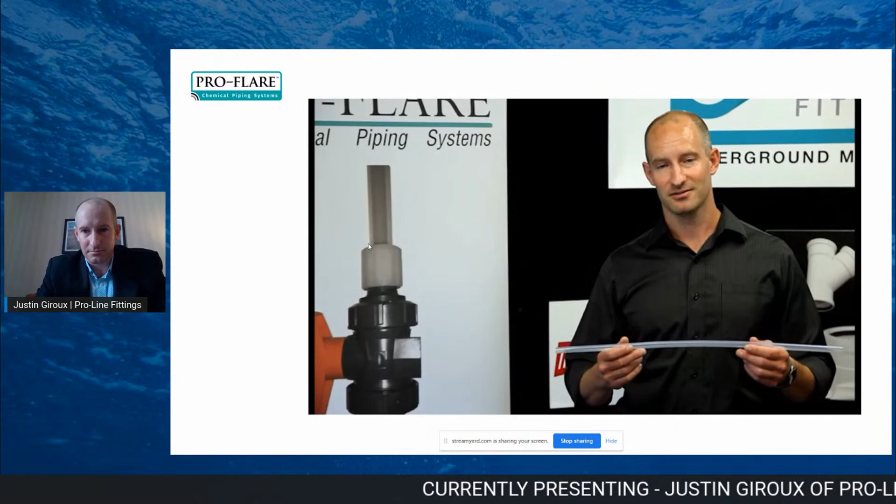The first thing we want to do is get our heat gun started. Okay, so now our heat gun is warming up. Next thing we want to do is make sure that we have a nice, clean, and flush cut. So we have a nice square cut. Our heat gun is warm enough, and now we're going to look at our clock.

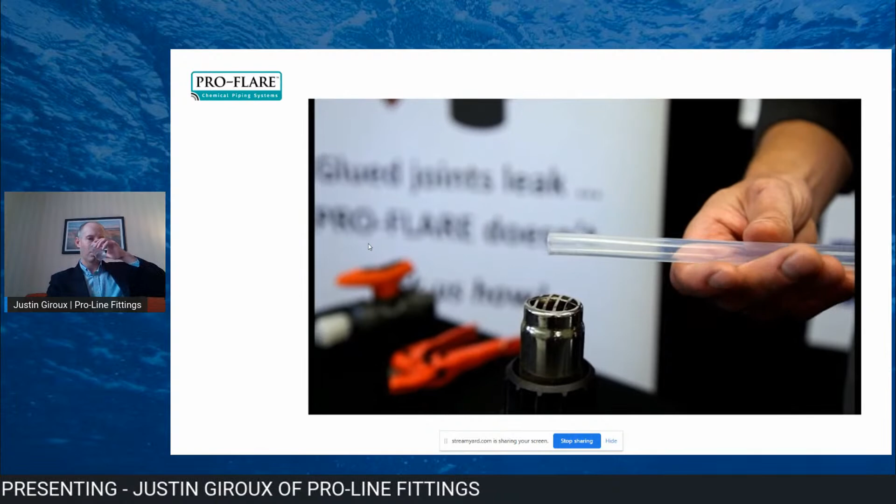We want to warm this tubing up for about 20 seconds, and we're going to keep an eye on it, turning it as we go. After 20 seconds, the tubing will start to go clear, and then once it's done, we simply remove it from the heat and apply it to our mandrel with some force.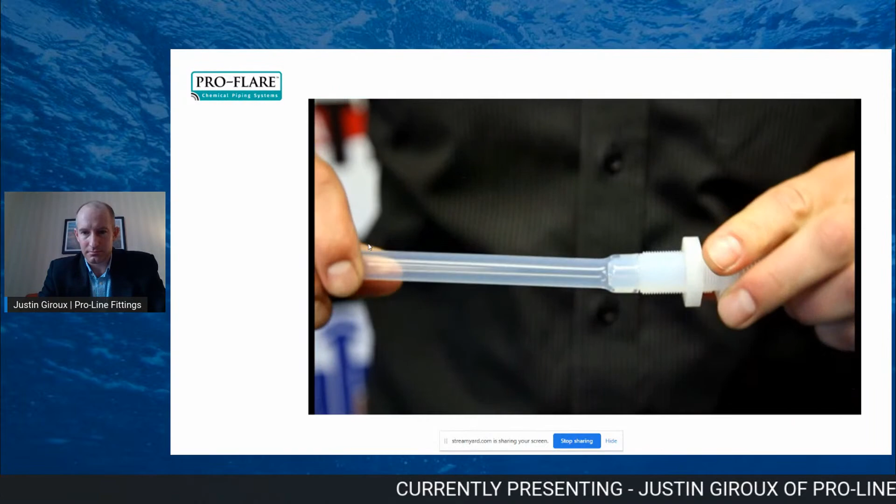So now we can remove this from our mandrel. We have a successful flare. We can now apply this to our fitting. So here we have our completed flare, and as you can see, it only took about 20 seconds to be ready for full line pressure.

Here we have our ProFlare tubing connected to a true union ball valve. Proline Fittings is proud to offer you all of the necessary components to connect you from the injection pump to the injection point. So there you can see it's very simple to make a flared connection.

What we do at Proline is consult with municipal end users, operators who are tired of repairing PVC connections, and we'll work with you to replace your entire system. We can do takeoffs based solely off of pictures and create detailed lists of all the components you require. We can provide training, and then you can essentially do all of your own skids by redesigning them using ProFlare. Very simple to do, and then you'll never have to replace a leaking joint again.

So installing ProFlare, we're going to get into details. Again, you're widening the end of the ProFlare tube such that it can be inserted over the shoulder of the flare fitting, and then the flare tube nut secures down onto the fitting.

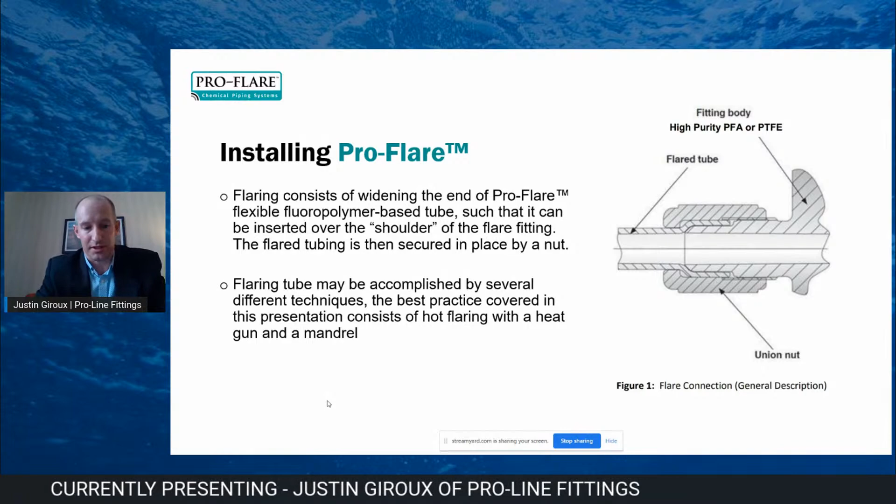Tube preparation, I mentioned this in the video. It's very important to make sure you have a 90-degree cut on that tube. We have a new flare fitting that includes a barb collet that allows you to get away with a bit more of an angle to your tubing. But by all intents and purposes, you want to just make sure you have a nice square cut when you're cutting the tubing.

So using the heat gun, you're heating up the tube, and really any heat gun will work. You can go to any big box store and get a heat gun for less than $100. Forming the tubing over the mandrel is just using a bit of force. I recommend using a stainless steel mandrel - it actually helps to cool the tubing at the same time.

Also, one thing that's important to note is you'll want to use some type of rubber glove, like a grease monkey glove or a nitrile glove, because it'll help you grip the tubing.

That's the other advantage of ProFlare tubing - Teflon is still in the Guinness Book of Records as the world's slipperiest solid, right? Teflon coatings on pans and whatnot. So the advantage there is that any of these solids, the salts that tend to form with these chemicals that we use in water and wastewater treatment, will pass right through the tubing.

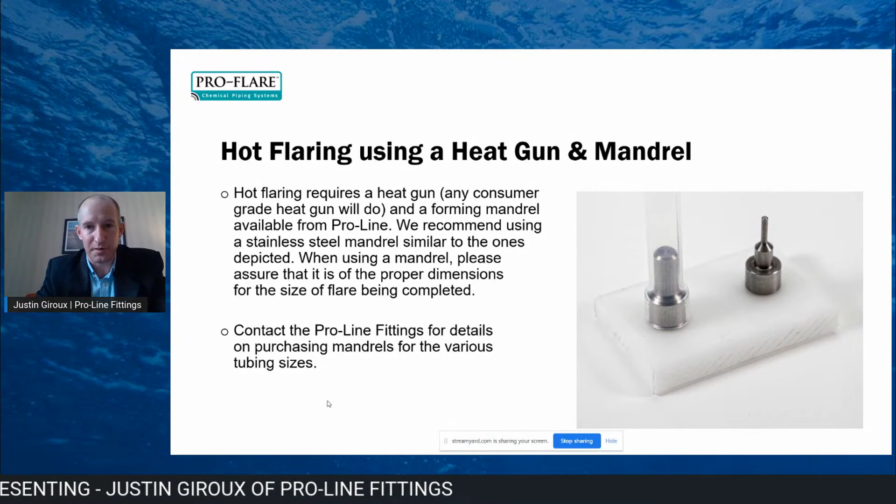So there are some minimum tube wall thicknesses you have to pay attention to. We learned the hard way that 0.062 wall thickness at 1/4 inch is too thick. You end up - it's doable, but very difficult to flare 0.062 wall thickness at 1/4 inch.

It's essentially the ratio of diameter to wall thickness, such that when you heat it up, the flare end breaks down on you and you end up with a kink. Doesn't look right. So at 1/4 inch, 0.047 tube wall thickness is what you want. And then beyond that, from 3/8 to 1 inch, you want to use 0.062 inch wall thickness.

Using the heat gun, again, you just heat up the end of the tube, rotating it around. It's a bit of a blend of art and science here, right? You're monitoring the end of the tube to watch it turn kind of translucent and then almost clear, but you want to move it away from the heat before it gets too clear.

So you do 2 or 3 flares and then you've got it. It's pretty straightforward.

So again, quickly and before the tubing has a chance to cool, you want to push it over top of the mandrel and hold it for 20 to 30 seconds. You could probably get away with less time than that even, but it's not a very long time - 20, 30 seconds to have it cool.

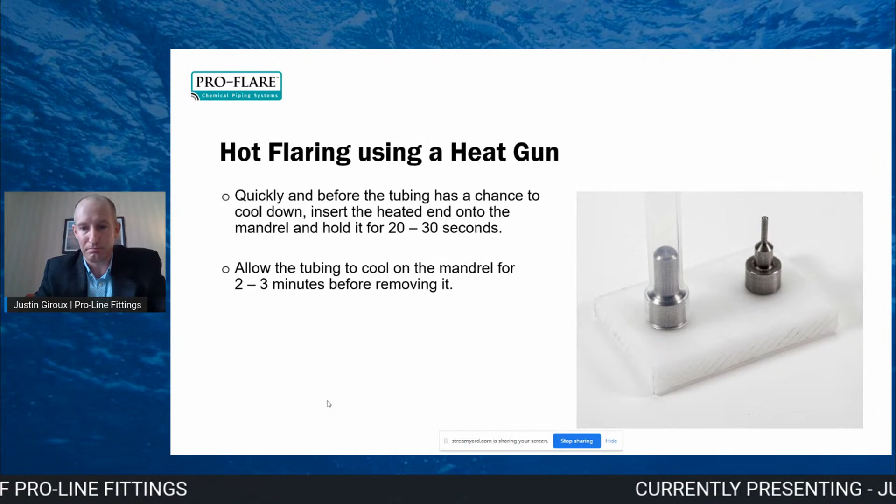And then allow the tubing to cool on the mandrel for 2 to 3 minutes before removing it. Again, if you were at 1 minute, say, on the mandrel, and then you put the tubing directly onto the fitting, I have seen failures when that is done.

So connect the tubing to the fitting. You want to insert the flare fitting into the newly flared end of the tubing. The fit should be nice and snug. In most cases, there will be a gap at the end of the tubing and the threads on the fitting. You can see where the threads start on that fitting. Having a little bit of gap there is good, it's okay. And then you just want to hand tighten that flare nut onto your fitting or onto your valve.

Hand tightening is generally good. There are torque spec guidelines you can use if you have a torque wrench to tighten that flare nut, but for all intents and purposes, it's not required. You're just hand tightening, get it nice and snug, and it's good to go. If you fire up your system and see it beading there, just tighten it up a bit more. But you can use a torque wrench and have specific torques on that.

So you're connecting the tube to the fitting. You want to pay attention to the gap. We have tolerances for this - you can see the A dimension is the gap between the end of the flare and where those threads start. You don't want too much of a gap, because that just means you didn't bottom out your flare on the mandrel. As long as you're bottoming out the tubing onto that mandrel, you'll have the proper bell, which eliminates any gap issue. Same thing with the flare length - that's the depth of the bell, essentially the B dimension. So we do have...

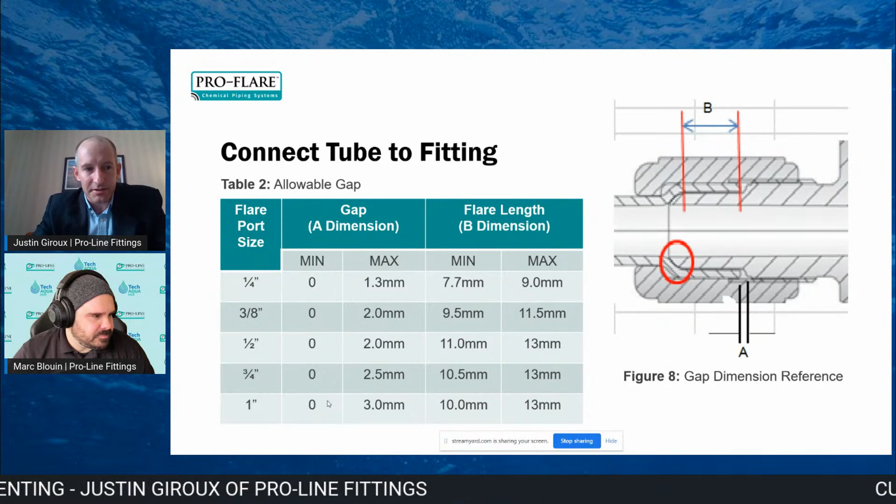I'm ready. So Marlon asks what size of ball valves you have to use with the Proline tubing - our hypo panels are 1/4 inch, but ball valves are 1/2 inch. Yes, it's true that industrial ball valves in PVC are limited to 1/2 inch, they don't go below that. Although you can get lab cocks made of PVC right down to 1/8 inch, and they typically have a PTFE Teflon seat. The disadvantage with a lab cock is that they don't have a removable carrier, so they're not really a maintenance-friendly valve. So typically what we see is a true union ball valve at 1/2 inch in diameter, and then what we provide is a 1/4 inch flare outlet. So you'd have a 1/4 inch tubing system connected to a 1/2 inch valve. There's no real issue with that, other than it might cost a bit more than, say, a 1/4 inch lab cock. But I think it's better to have the versatility of a true union connection, as well as being able to remove the carrier and access the internal components of the ball valve. So the best solution right now is to use a 1/2 inch ball valve with a 1/4 inch ProFlare outlet coming out of it.

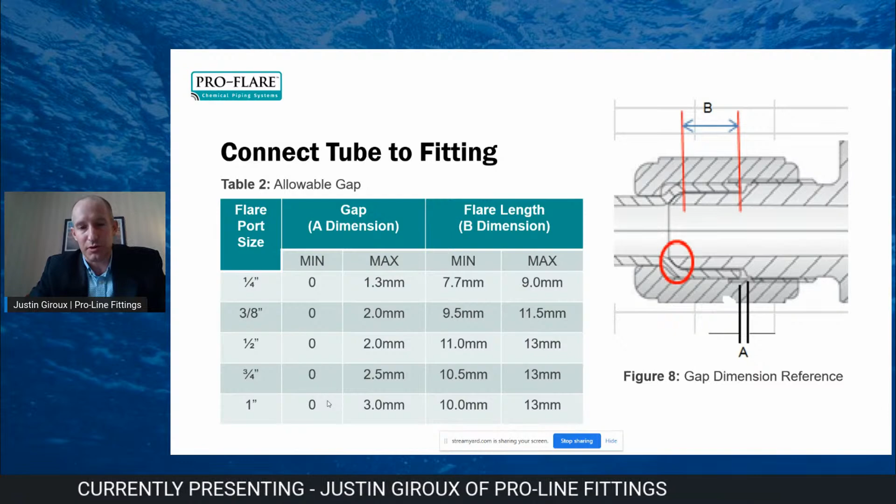Was there a second part to that question? Oh yeah, the back pressure valve comment - it says also need to connect on back pressure valves extra. Does that make sense? Yeah, so on back pressure - I actually have a slide on back pressure valves, so please stay tuned for that, Marlon, you're going to like it. On back pressure or pressure sustaining valves, we have ProFlare outlets right down to 1/4 inch in diameter, but same story - you need to use a 1/2 inch valve. Even if a 1/4 inch valve were available for a back pressure or relief valve, I'd still recommend sizing it up. The reason is there's quite a bit of flow restriction built in on purpose in a back pressure valve, and when dealing with chemicals and chemistries that salt out, it's better to have a bigger sealing area and flow path. I think that answers the question, but we'll get into more detail very shortly.

Okay, so that does it with installing ProFlare - very straightforward. We talked about wall thicknesses, the heat gun, how to flare, connecting to the tube, then connecting to the fitting, and now we're into the slide on LOX-8 paste.

This is manufactured by a company called Fluoramics, actually. We met them at a trade show in Chicago years ago, and I couldn't believe no one had really taken this product on in a wastewater treatment landscape. I think, well, it's expensive - we'll just say that right away. When you're comparing this to other thread sealants, it's way more money. We'll say that right away.

But it actually works, and their focus with this product is on oxygen gas service. I didn't realize this because I wasn't really involved in that industry, but when you're talking bottled gases, particularly oxygen, it's very difficult to get approval to work with oxygen gas. So that's kind of the big corporations like Linde, Praxair.

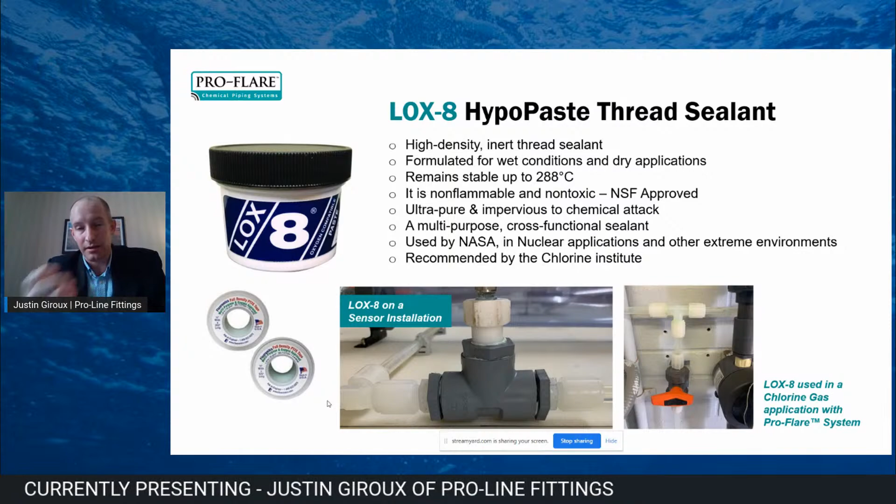Here's some before-after pictures. So we've got a chem feed system here that we worked with the operator - I should say the millwright - to swap out. You could see, I don't know if you can see my mouse, let's see if I can... there we go. I don't know if you can see my pointer, the cursor, but what they were doing is replacing PVC with CPVC, because some people say that CPVC has a better corrosion resistance than PVC.

That's kind of arguable. I mean, PVC is polyvinyl chloride, CPVC is chlorinated polyvinyl chloride. The purpose of CPVC is to give you more temperature range on the top end - I think it gives you about an extra 30 degrees C in terms of the hot temperatures it can handle. But in terms of corrosion resistance, it doesn't really help you much.

They were replacing PVC with CPVC, still getting the leaks. In this case, they were returning sometimes every two weeks to replace a PVC connection that had started leaking. So we worked with them to develop a new ProFlare system.

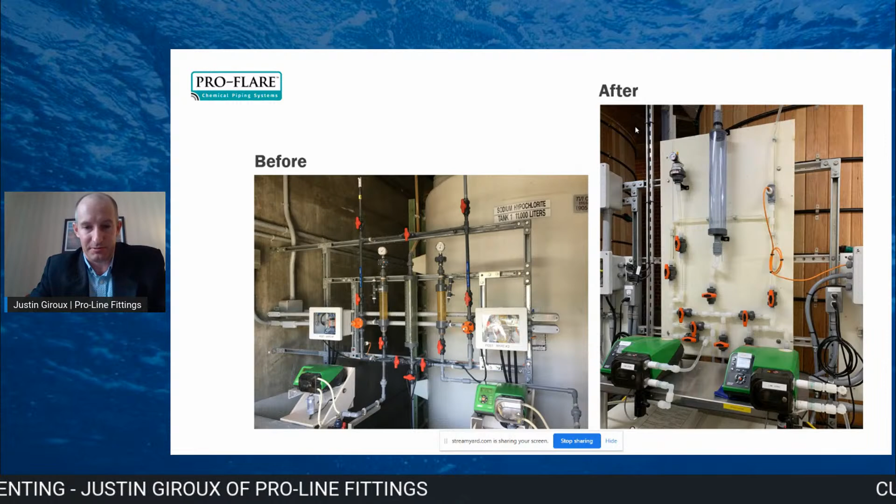This is working directly with the municipality, and I think they saved a lot of money because this didn't have to be an elaborate sort of engineered system. It was already existing, they just had to replace it. So we worked with them to provide the ProFlare system and all of their components, right from the pumps, as you can see, right to the injection point.

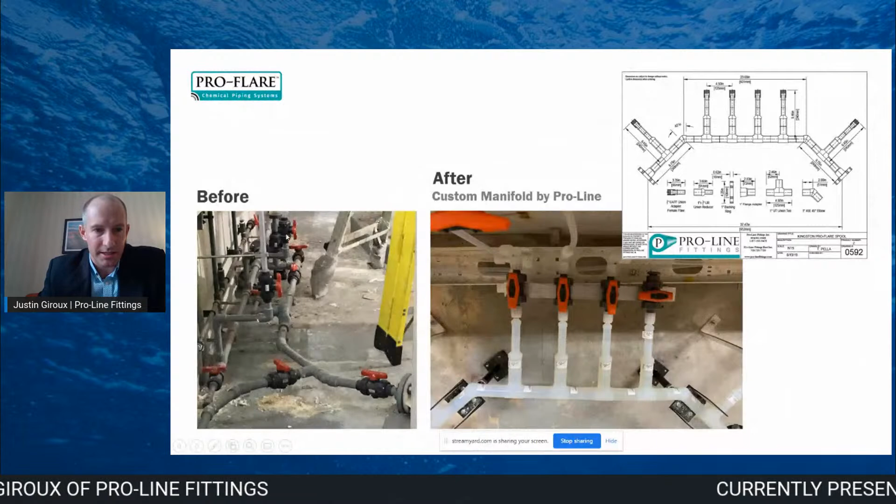This is a cool one. On the left here you can see the remnants of an old PVC system, actually parts of it are CPVC again, and this is in the middle of deconstruction. So there's a manifold that went between two hypo tanks. What we did was we consulted with them, and Proline designed this custom manifold, and we had that manufactured and supplied it to them.

So this custom manifold consists of IR fusion welded PFA Teflon rigid piping, all IR fusion welded together. We provided it complete with flanges on either end, and then ProFlare outlets at the end of all the stub outs on the manifold. You're able to connect directly onto your True Union PVC ball valve and then run tubing from the manifold. They really appreciated having this. We added some extras on there for future expansion as well.

So here we have some coils, the tubing coming out through the ceiling here. And you can see the remnants of the old spill where hypo kind of spilled all over this concrete wall. And now you've got your continuous coil running right to the injection point with our ProFlare tubing.

You can see I've got some arrows pointed to the LOX 8 at your threaded connections. There should be another one going to this calibration column here. But you can see where all of these threads are, there's no leaks, and that's because of LOX 8.

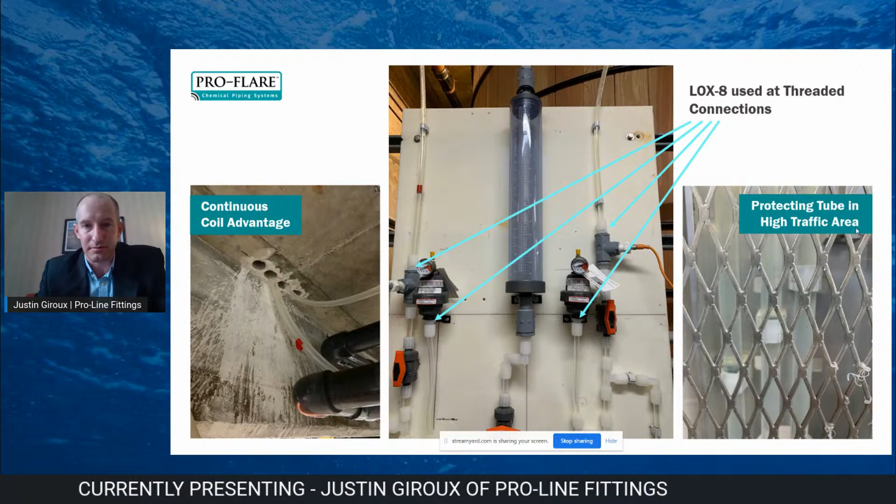We have tubing here—this is actually the millwright's idea. He used a cable tray to run the tubing, just like an electrical cable tray, and then we supply these clips that work nicely with our ProFlare tubing. He put an extra steel grate over top of the cable tray just to protect it in high traffic areas. But it was a nice solution. He keeps most of the tubing high and out of the way overhead. It also looks great, and it's really easy to maintain and see.

Okay, so that's it for some photos there. And now I will talk about the 586 pressure sustaining valve.

A lot of folks out there in Canada particularly will have chem feed systems that have back pressure relief valves—it's a critical component. These are what supply the back pressure, the resistive force to your solenoid dosing pump. They need to have that force in order to work properly, something to push against.

One of our competitors had a head start with regards to this PRV, and they were the first to bring a True Union PRV to market in Canada, made by a company called Stübbe out of Germany. But Georg Fischer took that design, which was really—I don't know if revolutionary is the word—but it was the first one that was true union in design. They took it and ran with it and made some design improvements.

So the other PRV, which also happens to have an orange top, uses bolts to hold the upper bonnet down onto the body. Those bolts, well, a couple of things: first, they're cumbersome to deal with when we're talking about valve maintenance—you have to remove all of these internal components of the valve. Also, being that they're metal, we're dealing with chemistries here, and metal and these chemistries don't get along. So now we've got a corrosion point with these metal bolts.

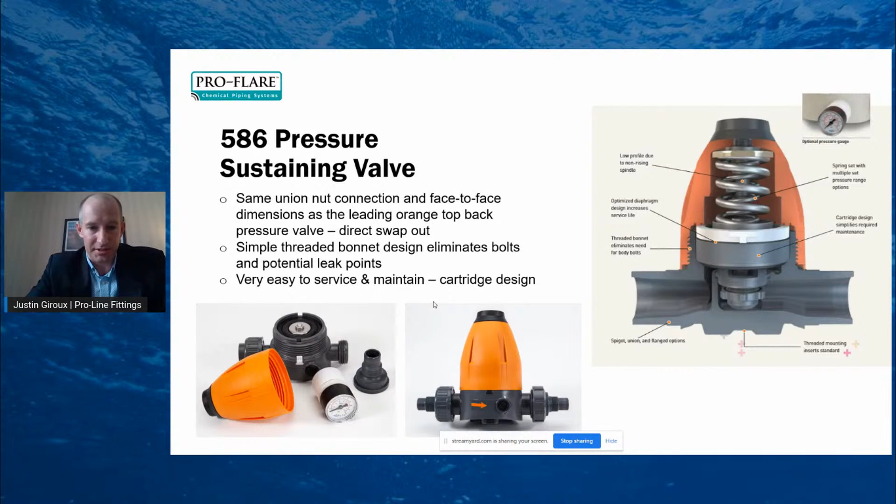The final benefit, which makes it really easy, and you could call us right away with your orders, is that the union nut connection and the face-to-face dimension are the exact same as the competitor's. So if you have one of the competitor's valves and you're not so happy, you want to give this one a try, you could take it out of the line. You just disconnect your union nuts, put in this GF586 sustaining valve, thread your union nuts back up, and away you go. There's no piping that needs to change, unless of course you're changing to the ProFlare system, which I would recommend.

That's it. Really quickly, from ProLine Fittings, we have a lot of products available in water and wastewater treatment, from PVC, CPVC, polypropylene, PVDF, ECTFE or HALAR, lots of different thermoplastics depending on the chemical and the application, including up to dual containment. We do everything from calibration columns to gauge guards, injection quills.

We have a line of pumps as well, both peristaltic and solenoid-driven pumps. We do flow, level sensing and controls. Of course, we saw that slide, the presentation from GF on the Flowtramag. We have all of your different analysis: pH, ORP, dissolved oxygen, conductivity, etc.

We have this cool valve here, actually, I really like this one. It's kind of in a different vein, but this is a wastewater valve from Schuster Systems. It combines a ball check valve and a 90-degree bend, so it's really ideal for maximizing your footprint in a waste plant application, particularly good with sewage lift stations. We've been seeing a lot of activity on that valve lately. It's a new patented product.

We have products from Trumbull Manufacturing: mud valves, hydrostatic tank pressure relief valves, and valve adaptation. So if you have a valve in a spot within your water plant that's in a confined space, we've got mitered gears and knuckles and all kinds of ways to get you from that valve to an operator, with all different types of offsets, so that you never have to enter a confined space again to operate that valve manually. We do all those custom valve adaptations and controls.